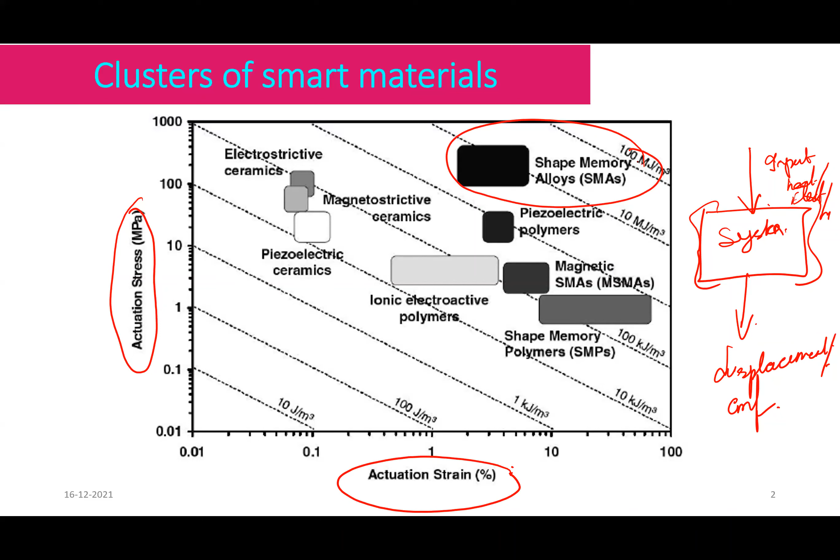That is where exactly shape memory alloys play a major role, because shape memory alloys have a good amount of actuation stress as well as a good amount of actuation strain.

Now, if I try to look into the fundamentals of shape memory alloy - like you have ice, when you heat the ice you get water, and further heating gives you steam. So basically there is some kind of phase transformation happening. The same phase transformation happens in shape memory alloy, which makes it respond to heat.

The austenite phase is a high temperature phase with a cubic crystal structure, while the martensite phase is a low temperature phase with a monoclinic structure. To give you clarity about this shape memory alloy, let us consider a wire.

This wire is initially in the martensite phase. Now I am deforming it, and it becomes a deformed martensite.

When I try to supply heat, it comes back to the austenite phase, and again it comes back to the martensite phase. So this is how the cycle basically evolves in the material.

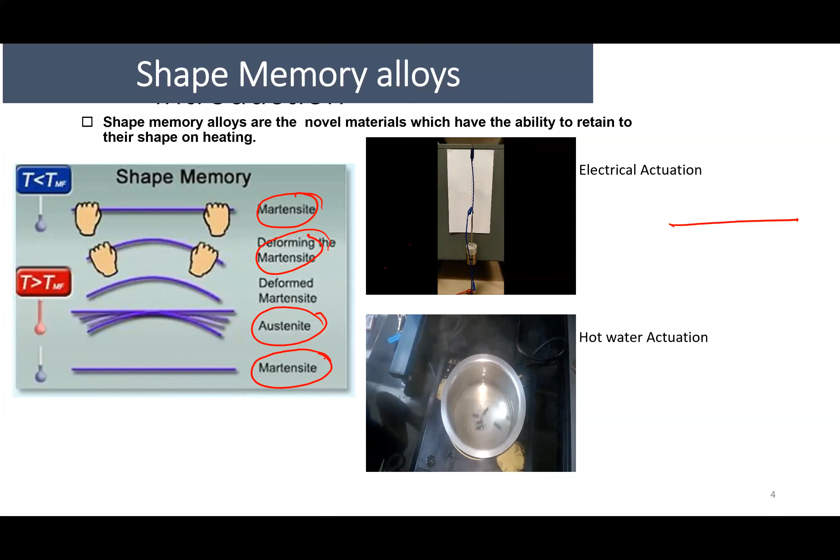This video was recorded in our laboratory, where you can see there is a spring which is tied to a weight. Now what I'm doing is supplying heat through electrical biasing. When the electrical biasing is not supplied, the material is in the deformed martensite state. When I apply heat through the electrical biasing, using H equals I squared RT, the material reaches the austenite state, and then it comes back to the martensite state. So we are trying to switch between the austenite phase and the martensite phase using electrical actuation.

This is a video where one of our PhD scholars deforms the spring and puts it inside hot water. When we put it inside the hot water, it tries to come back to its shape. You can have a closer view, where we see the response of this material is quite good, and it comes back to its original shape.

So this is basically the characteristic of the shape memory alloy, where with respect to heat, you are trying to manipulate your strain and your stress.

In addition to this, there is a behavior of these materials which we call superelasticity. This superelasticity gives the material a capability to store energy, so it can be used as a damper. These are the two peculiar capabilities of shape memory alloys.

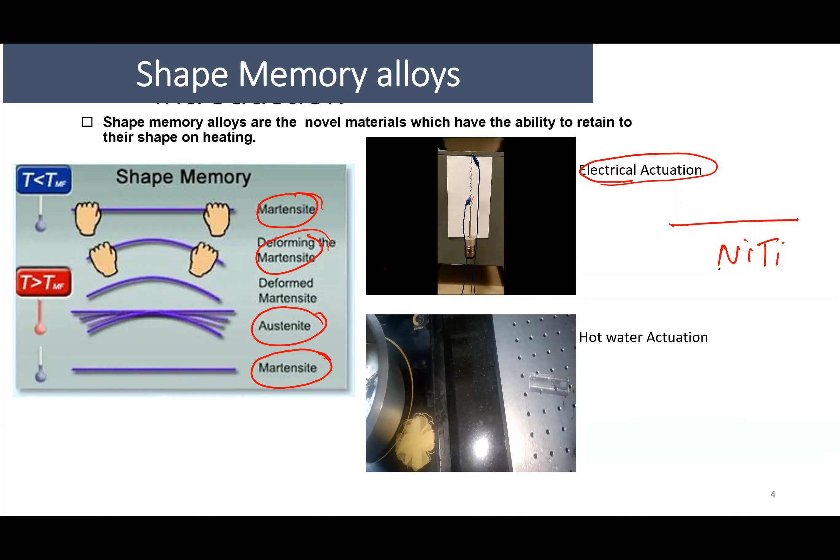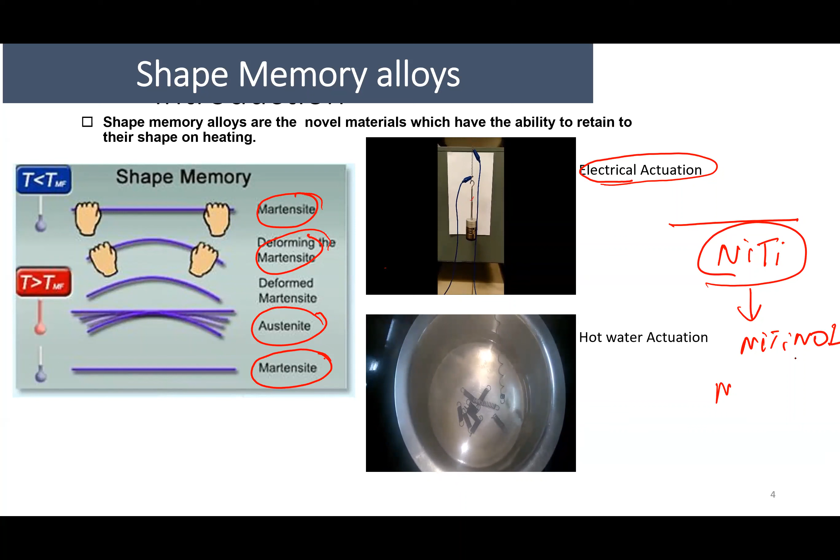As far as shape memory alloys are concerned, there are wide varieties of materials that exhibit this behavior. One major or standard material that comes to mind is NiTi, which we call Nitinol. The full form of Nitinol is Naval Ordnance Laboratory. This was developed in the US for ordnance purposes, which is why it carries that name.

So we have NiTi-based shape memory alloy structures. There are also some copper-based shape memory alloy structures available, like Cu-Al-Ni, Cu-Zn-Al, Cu-Al-Mn, etc. So these are the different types of copper-based shape memory alloys that are also available.

Now you may ask me: when should I go for NiTi structures, and when should I go for copper-based shape memory alloy structures? From an application perspective, wherever I have an actuation temperature in the range of 90 to 130 degrees Celsius, I can go for nickel titanium. Wherever I have an actuation temperature from 230 to 350 degrees Celsius, I go for copper-based shape memory alloy structures.

To give you a better picture, consider a vehicle: the heat generated from the bonnet will be sufficient to actuate a NiTi shape memory alloy structure, while the heat generated from the exhaust will be sufficient to actuate a copper-based shape memory alloy structure.

Now, as far as shape memory alloy structures are concerned, when we look at the overall structure based on literature or applications, NiTi structures are either in the form of bulk or in the form of a thin film. For bulk structures, we can fabricate thick bulk structures, actuate them, and arrest vibration. So this is one option.

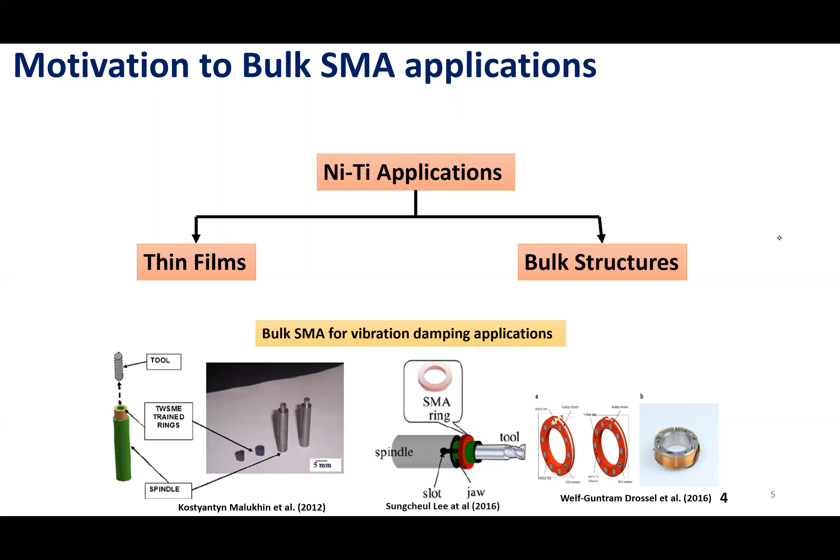Whereas in the case of bulk, it is quite limited because there are some issues with bulk structures. As far as NiTi bulk structures are concerned, people were more focused on developing powder metallurgical based systems - basically small cylinder kind of structures which they have developed, demonstrating the shape memory effect. In fact, most people have demonstrated the super elasticity behavior because of these bulk structures.

But as far as the major challenges are concerned, this was what we faced when we took shape memory alloy as our research interest. We found that there were some kind of issues in considering these shape memory alloys for different applications.

The one major concern is that when we started our research, shape memory alloy production was not available in India, so we needed to get it from abroad. Even a spring would cost us something around 3,500 rupees, so we needed to handle it carefully.

Another option is we get the shape memory alloy either in the form of a sheet, a wire, or a rod. That's it. So if I want to make a spherical or cylindrical structure, there were no vendors available to prepare those structures. It was not commercially viable for us to prepare those structures.

Third important aspect with respect to shape memory alloy is that to get such kind of displacement, we need tedious training. In order to reduce this tedious training, one option would be to integrate some kind of composite behavior in it. Otherwise, the training cycle itself will last near to around 50 to 60 times.

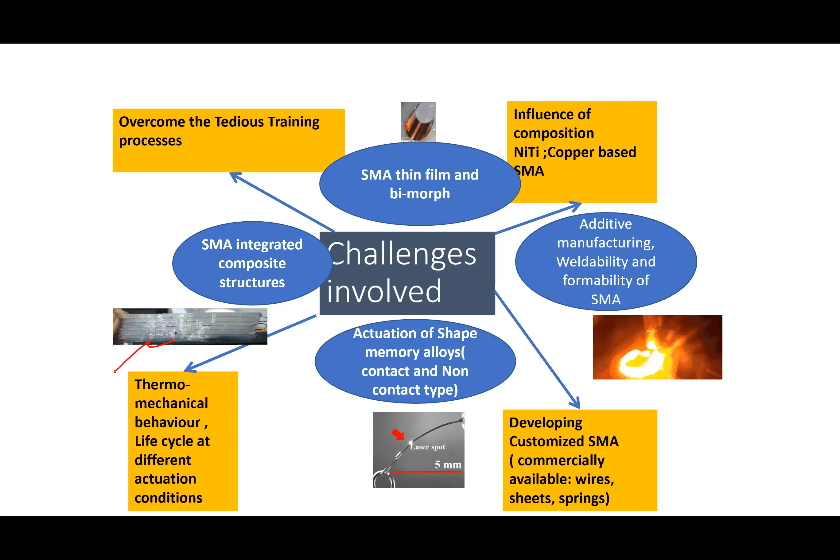As far as additive manufacturing is concerned, you might have gone through different lectures by different experts where people have attempted different types of additive manufacturing. We also thought, why can't we explore those options to develop such shape memory alloy structures using additive manufacturing? In this talk, we will discuss laser-based additive manufacturing of shape memory alloy structures.

Second, we have developed a wire arc-based additive manufacturing system - a low cost system which we developed in-house, basically to focus on shape memory alloy structures.

The third content which I would like to discuss is integrating a laser with wire arc to get thin structures, basically for some particular applications. We explored this possibility and could observe that there was potential focus in this particular region.

The fourth case study I would like to discuss is related to micro additive manufacturing, which is one of our prime current focuses. This system is completely developed at IIT Indore, where we have used a concept called laser induced forward transfer for fabricating microstructures. Any kind of microstructures or smart materials can be fabricated, which we will go into in detail.

So let us come to the first topic, laser-based additive manufacturing of shape memory alloy structures. As far as this is concerned, we had a motivation for starting this work - it was Industry 4.0. We all know about the different industry revolutions, and with respect to demand and availability of resources, different industry revolutions came into existence.

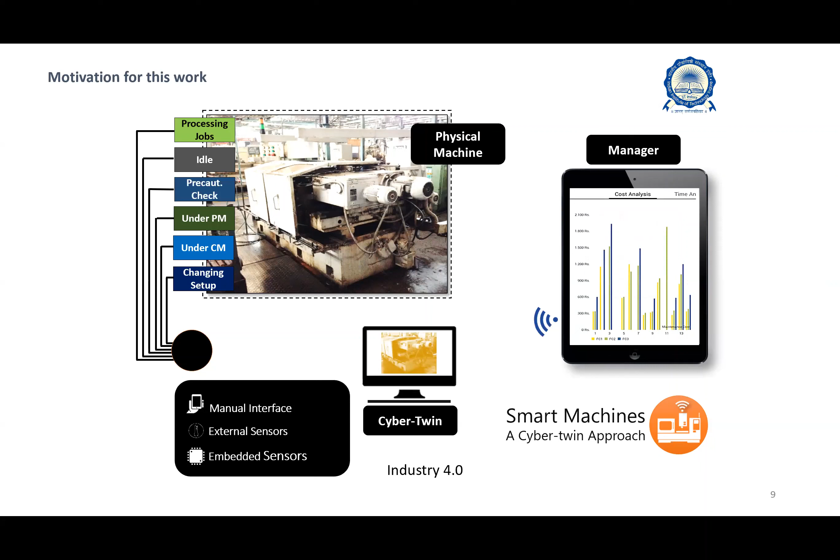He was trying to develop an intelligent system where there was an old machine, and he needed to make it intelligent. In order to do that, we need to incorporate a good amount of sensors and actuators into these systems, so they can pick up the signal and communicate it easily. Basically, your data sets will be quite heavy, and from the data sets you can take logical decisions. That is the idea behind this kind of system.

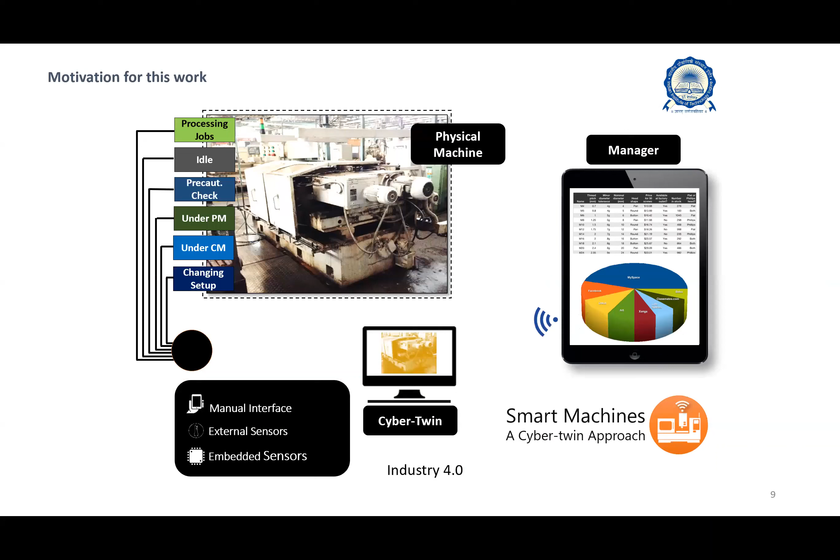The main core of this is to develop a cyber twin from this intelligent machine structure. As far as this machine is concerned, we need to develop customized sensors for it, and that is how this shape memory alloy came into the picture.

For any machine tool, take any system like a drilling machine or a milling machine - before it fails, two important things happen. One is a high amount of heat, and another is vibration.

Since our material is more sensitive to heat, we thought we would fabricate a structure over the quill. Over the quill, we try to deposit our shape memory alloy along the tool holders. When heat is generated, this shape memory alloy holder gets heated up, and we have trained the system so that it will arrest the vibration. When it arrests the vibration, you are prolonging the failure for a long time.

In the meantime, there is an infrared camera available. Through this infrared camera, we can pick up the signal, and the signal will be efficiently transferred to the concerned shop floor manager, so he can get involved in maintenance of the equipment or make the necessary decision in changing the process flow.

The major challenge involved is that I need to deposit an SMA spring on such structures, or fabricate it and fit it based on the requirement. The second important aspect is it should have the capability to arrest vibration, and since it's a metallic layer, it should also have the capability to actuate because of the heat. These are some of the major concerns we had in mind.

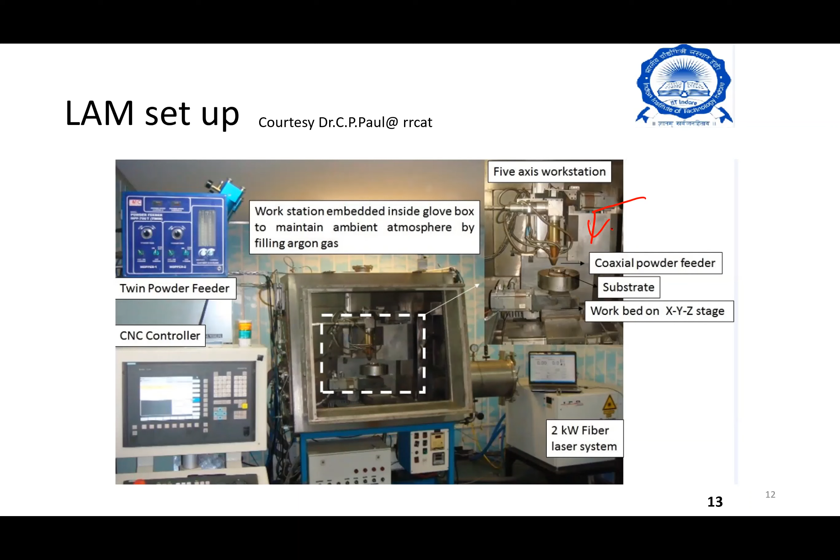The titanium substrate chosen for our experiment is expected to allow for easy debonding, as well as take care of the thermal expansion because of the difference in Ni and Ti.

Prior to the experiment, we cleaned and sandblasted our system to roughen the machined surface so as to increase the laser absorption. An argon gas was used as a shielding and carrier gas, and it prevented oxidation.

Basically we took a 1:1 ratio of nickel titanium. There are 3 different combinations with 3 different powders we use. One combination's main focus is to check its composition capability - with respect to variation in composition, how does it behave? So there are 3 different NiTi compositions with powders at 3 different weight percentages: one is NiTi 45-55, another is NiTi 50-50, and another is NiTi 55-45.

In addition to this, since our main motto is to have an actuation, we should have some kind of ductility. So we went for a kind of ternary composition. In this ternary composition, we mixed NiTi with Cu, etc.

In order to optimize the process, a number of tracks were deposited at different process parameters. After deposition, the process tracks were examined and the uniform track was analyzed.

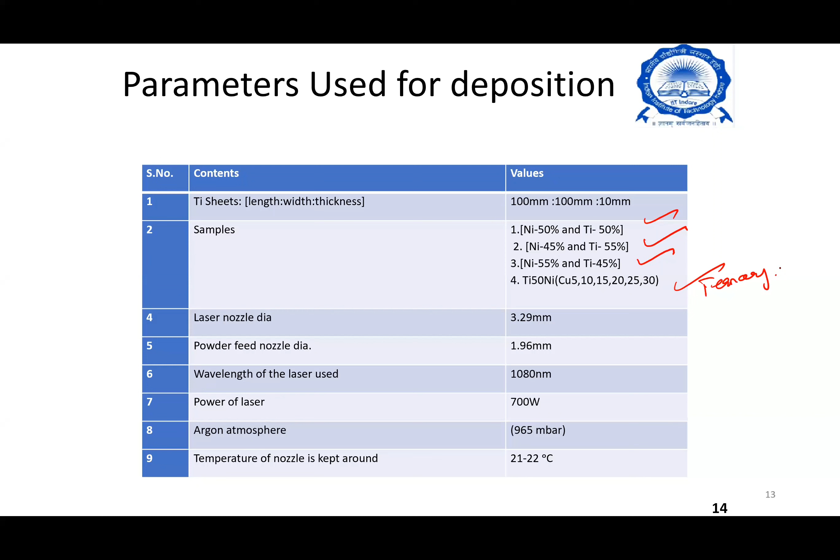Since we are using a powder, our main motto would be to investigate the influence of process parameters. One key parameter is the particle size chosen. The powder particle for Ni and Cu powders had a size within the range of 45 to 106 micrometers, whereas it also has a range of 75 to 150 micrometers for titanium.

These ranges of powder particles were selected for the experiments. Powder particles with a bigger size and range result in a semi-fused particle due to smaller absorbed laser energy per unit.

When we talk about the effect of these process parameters, as far as the laser additive manufacturing process is concerned, this process is basically governed by the laser power, then the beam diameter, then the material feed flow rate, and then we can also talk about the scan speed.

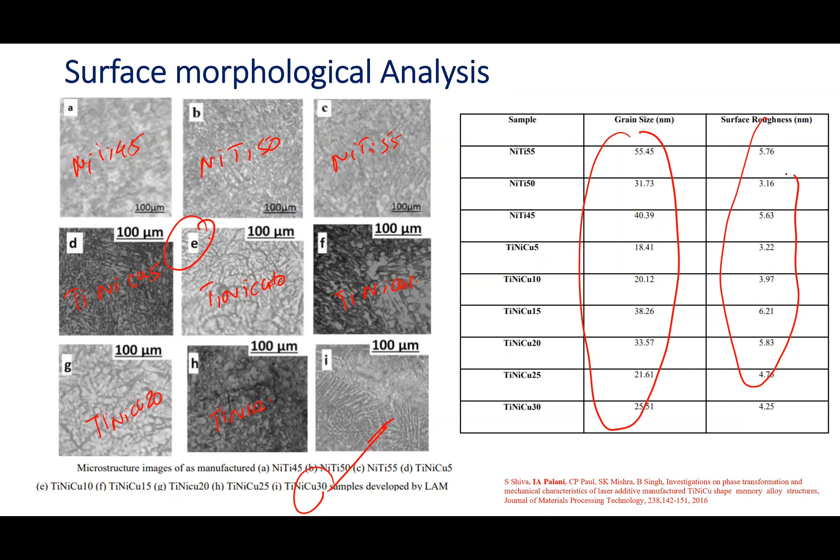When we closely observe the AFM analysis, we could map our grain size with respect to the surface roughness. As far as our case is concerned, the surface roughness is of least concern, so we don't need to worry about it.

As far as this material characterization is concerned, the samples of these laser additive manufactured structures were cut transverse to the direction of laying and prepared using a standard metallographic technique, and a microhardness measurement was carried out at an incremental distance of 25 micrometers at a load of 500 grams.

As far as this case, the average microhardness in the case of NiTi structures is in the range of 380, 440, and 525 VHN. The value of this microhardness is more for a titanium-rich sample, and this might be due to the formation of a hard phase caused by the increase in titanium content.

Now, when we talk about the microhardness of the ternary alloy, the NiTiCu samples fabricated by this technique showed a microhardness in the range of 237 to 297 VHN. The microhardness in these samples increases with increase of copper concentration, and higher concentration of copper causes the formation of precipitates like TiNiCu2 and Ni2, which attribute to the increase of microhardness due to internal stress. But in the ternary alloy with the inclusion of copper, this problem could be overcome, as the variation in hardness is uniform across the sample. This is almost a clear indication that a good alloy formation has been formed.

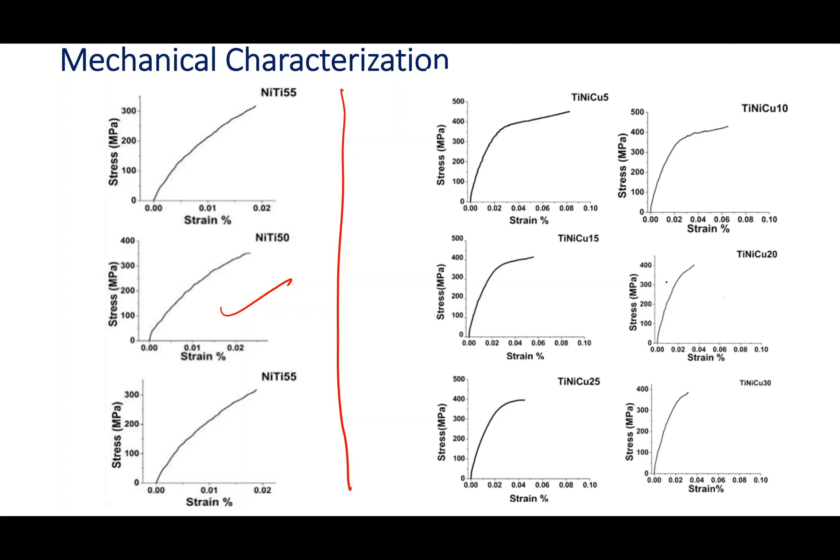Now when we talk about structural analysis, one of the key parameters with respect to shape memory alloy is the formation of the B2 phase. This B2 phase plays a major role, which basically confirms that there is a kind of shape memory effect exhibited on the surface. This was evident with respect to NiTi structures as well as TiNiCu structures, confirming that we have a shape memory alloy effect being formed.

But when we tried to fabricate the structures and put them in the field, within no time breakage was observed, because the results show there is quite a good amount of brittleness present. In order to avoid that, when we investigated, we found there was some non-uniformity in the structure. This non-uniformity happens because of the exothermic reaction generated between the NiTi and Cu structures, causing some amorphization here and there, along with residual stress generated in that region.

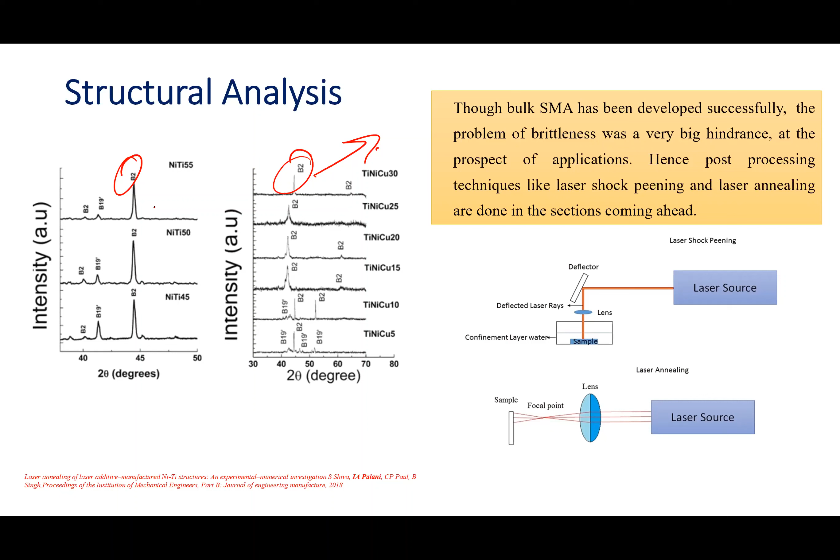So what we thought is we will go for some kind of post-processing. Since we have a laser in mind, we thought we would go for laser-based post-processing. One technique we employed is laser-based peening, and the other is laser-based annealing. With laser-based annealing, we thought we could somehow eradicate the amorphization and relieve the stresses. In the case of laser peening, we try to induce uniform stresses along the surface to get a proper structure. This comparison gives us clarity.

As far as functional characteristics are concerned for shape memory alloys, the major one is DSC, which is differential scanning calorimetric analysis. This scanning calorimetry analysis basically gives us the exact austenite start, austenite finish, and martensite start, martensite finish temperatures. From an application perspective, this gives me a window of when my sample will get actuated, and what temperature range it exactly gets actuated in.

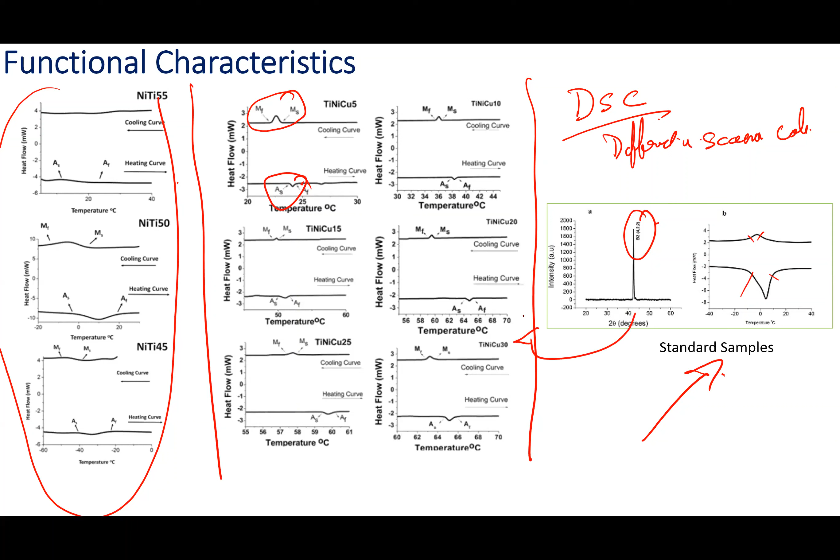One of the key applications, coming back to our motivation, is that our shape memory effect is confirmed, whereas we need to study how the storage modulus plays a major role. For that, we did an analysis called dynamic mechanical analysis.

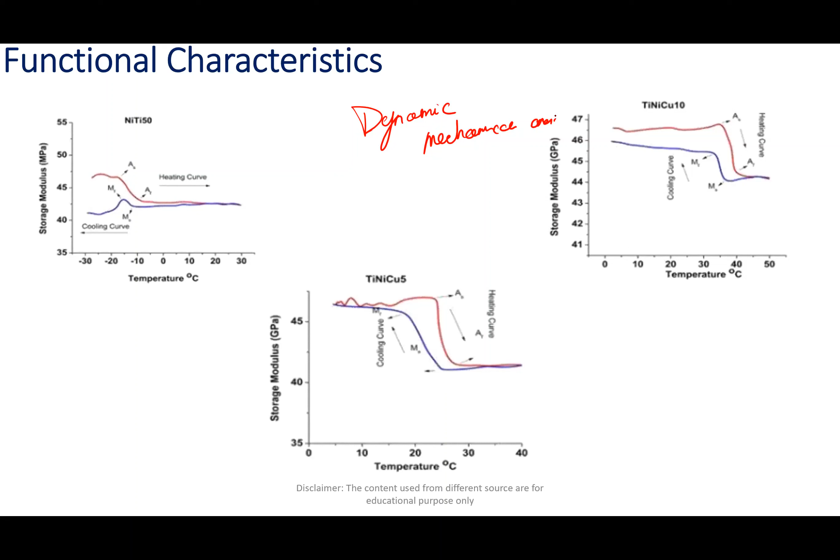This dynamic mechanical analysis gives us clarity about the storage modulus. Considering the elastic energy and storing properties of the material, the properties are analyzed on cooling and heating measurement by using several frequencies of applied dynamic force. Basically the structure will look something like this. If this is our sample, we mount it and apply a dynamic loading in this structure, and we also study the austenite.

From this we can estimate the austenite phase, the austenite start and finish, as well as the martensite start and finish of the structure. This is similar to what we call Young's modulus. This is almost away from the DSC.

So with this we are closing the first module. Any questions or doubts in this? Participants, please write your question in the chat box, or otherwise unmute yourself and ask the question. Okay, since there are no questions, no questions, Dr. Palani? Okay, please, we will continue. Yes, please.

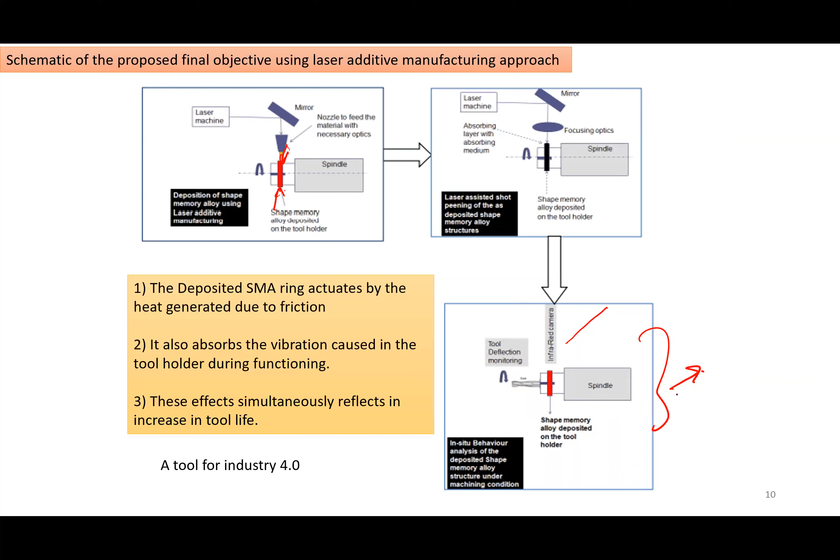Okay, shall we go to the next case study? The next case study is something related to wire arc based additive manufacturing. As far as this is concerned, we were more concerned about developing a device called a small micro gripper. For this micro gripper, let us consider I have a shape memory alloy which I have fabricated in the form of a circular ring.

I'm just dicing it into two. So both these splines, I'm just putting it over here, and then there is a gripper which is available. So what I'm doing is I'm just actuating it. When I try to actuate, it becomes straight and it will hold the object. When it tries to hold the object, and when you cut off the heat, it comes back to its state. That is how we can initiate a two-way actuation in this.

Now, the interesting part of this particular system is, suppose I need to use it in some kind of reserved environment where I cannot use a power supply. There, I can use hot water - I can just push hot water inside for actuation. Another aspect is I can use a laser so that at a distance, in that environment, I can just actuate my system.

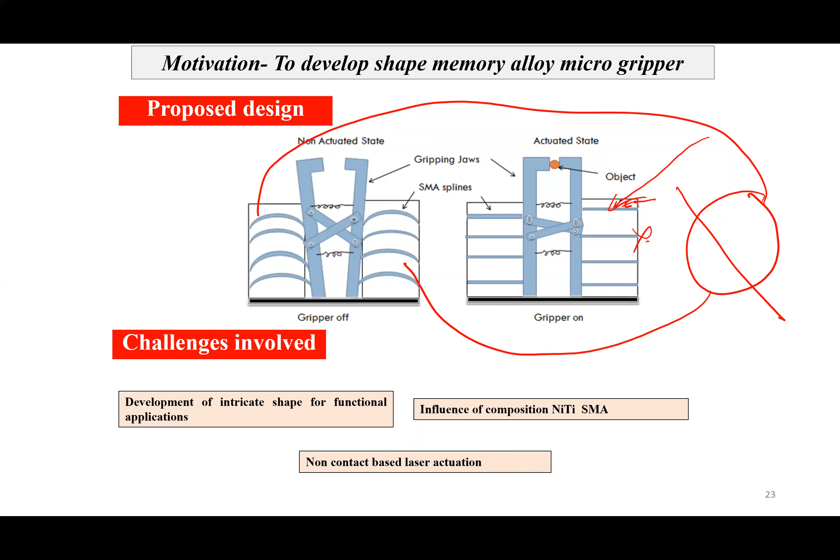You might ask why we didn't use the earlier system. What we could observe is, in the earlier system, we could get the property, but when we try to look into the reliability and life cycle of the shape memory alloy we fabricated, it was very difficult for us to use it for a longer life. That is because we are having two powders, and we are trying to fuse these powders to make it in the form of a shape memory alloy. So internally there were some kind of exothermic reactions coming up, and during the heating cycle we could observe it was initiating some kind of failure on the surface.

So in order to avoid that, we thought of developing our own additive manufacturing system. This is a simple MIG based additive manufacturing. We call it wire arc based additive because we use an NiTi wire which is commercially available, and we feed the wire through a MIG gun. We manipulated the structure - we developed our own XYZ stage, and this XYZ stage is fed to a controller where, using a CAD model, we can convert into a CNC code, and that CNC code is fed into the XYZ stage to create the structure.

So the flexibility of this system is we don't need to worry about maintaining the powder composition, etc. We just get the wire - this machine has a capability to use wire in the range of 0.8 to 1.2 mm. We can select that wire diameter, feed it, and fabricate the structure. This is a small video which shows how it tries to build the structure. We dedicated this machine basically for shape memory alloy so that we can build customized shape memory alloy structures - that was the idea in mind when we developed it.

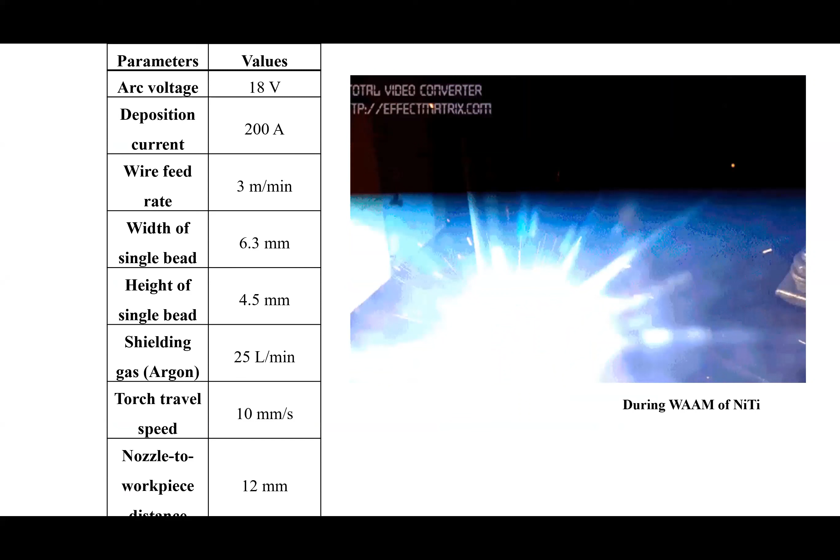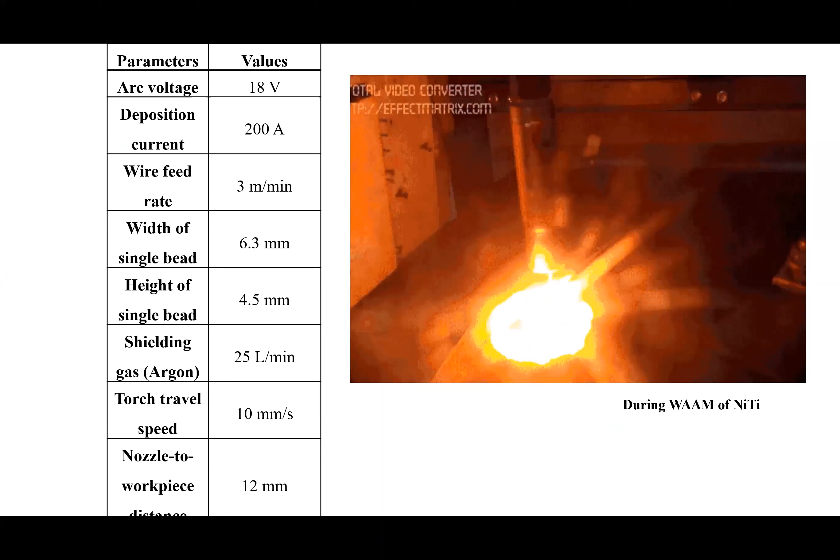And the interesting part in this is, as we all know, the crystallization or structural aspect of it basically depends upon the substrate heating. So we employ two different substrate heating methods. One has a capability to heat from room temperature to 600 degrees Celsius, so that we can take care of the crystal structure which is being generated.

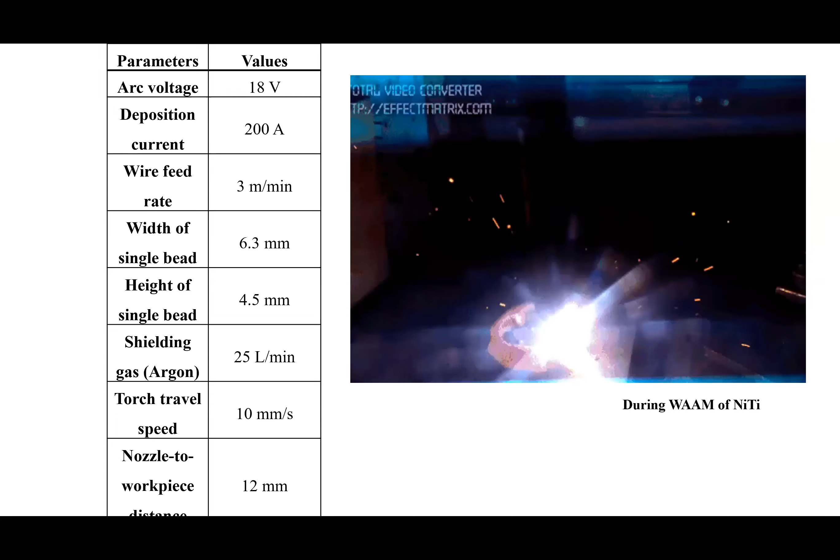Another aspect is, since we had a cooling bed, we pumped liquid nitrogen inside it. This also helps take care of the crystallization. It has a turret-based rotary system, and in this system we kept two substrate heating systems.

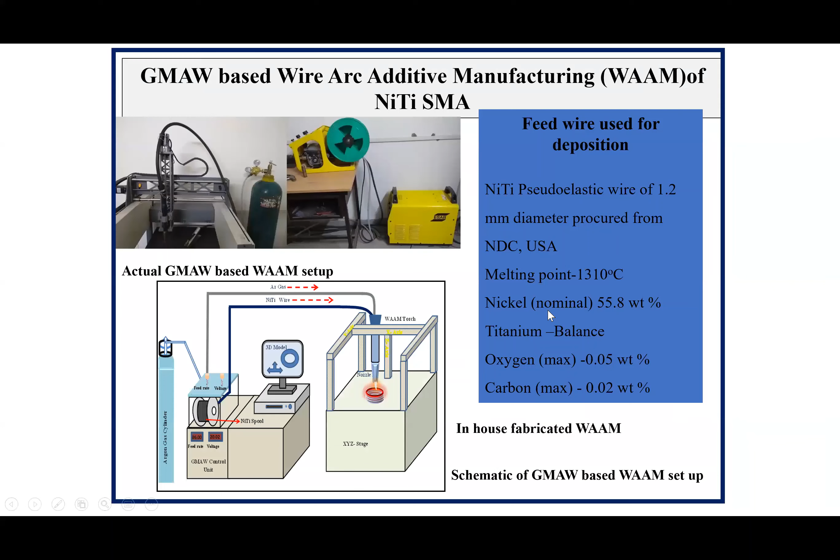So we just make it in the form of a thin... Section, Palani, we lost you, can you maybe explain from the last slide? From this? No, not like that. Can you go further? From here. This one? Okay, is it okay now? It is okay, the second time it's happening actually. It's okay, no problem, please carry on.

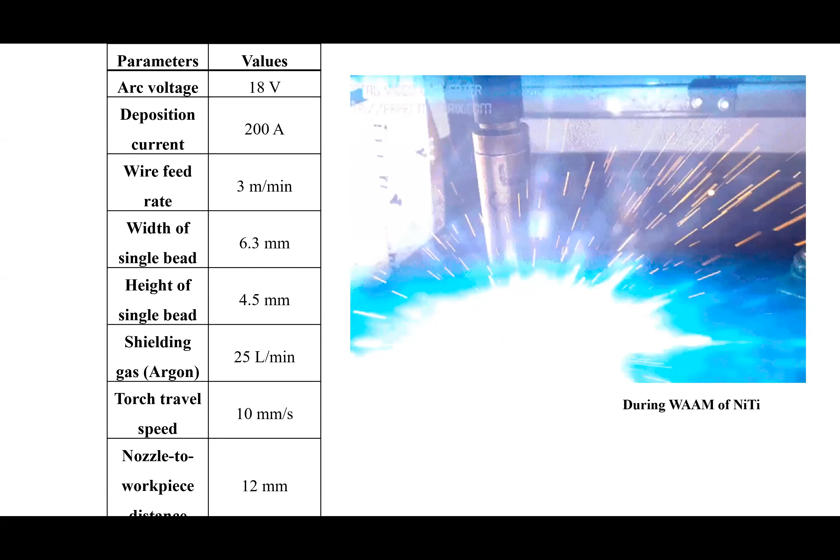As far as this wire arc based system is concerned, we could manipulate two different heating bed systems. One heating bed system has the capability to vary temperature from room temperature to 650 degrees Celsius, so that we can take care of crystallization during the building of the structures.

The other bed had a cooling arrangement where we could feed or pump liquid nitrogen inside it, so that we can take care of the crystallization behavior in that structure. We also had a turret mechanism so that we can fix these structures into place.

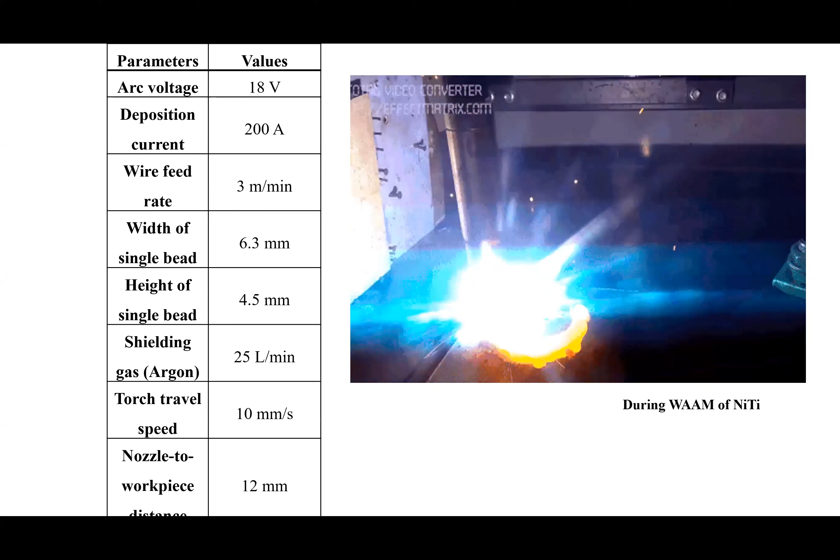Now, as far as sample preparation or methodology is concerned, we built NiTi structures. Using wire EDM, we made small pseudo-elastic NiTi structures, and then annealed them to activate the SMA-based behavior. By applying stress, we can get detwinned martensite as well as austenite phase, and by comparing these two we can achieve actuation. That was the idea we had in mind.

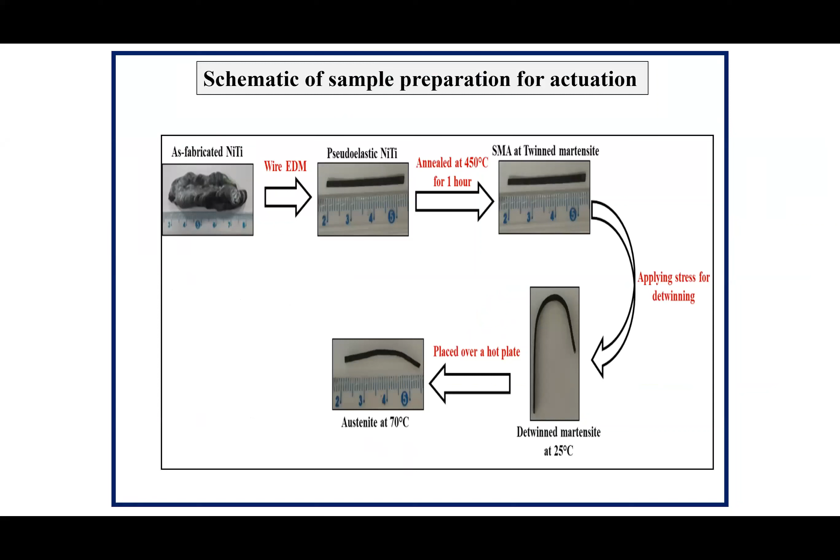In fact, it was quite flexible for us, because whichever sample we fabricated, we could evidently see the actuation coming out of it. I'll go into detail on how we predicted and analyzed our actuation.

Before going into this, let's look at it from the additive manufacturing perspective—this is kind of a crude method. In fact, from our group, it was the first of its kind, coming up with this technology of fabricating NiTi structures using wire arc.

In order to get metallurgical grounding, we collaborated with a Russian university, from St. Petersburg University. They have been working on powder metallurgical based NiTi structures and have a strong background in the metallurgical aspect of shape memory structures. We collaborated with them to understand the mechanism happening in it.

We could easily fabricate the structures, and when we analyzed them, no cracks were observed, because in most cases we used substrate heating of around 250 degrees Celsius in order to maintain homogeneity.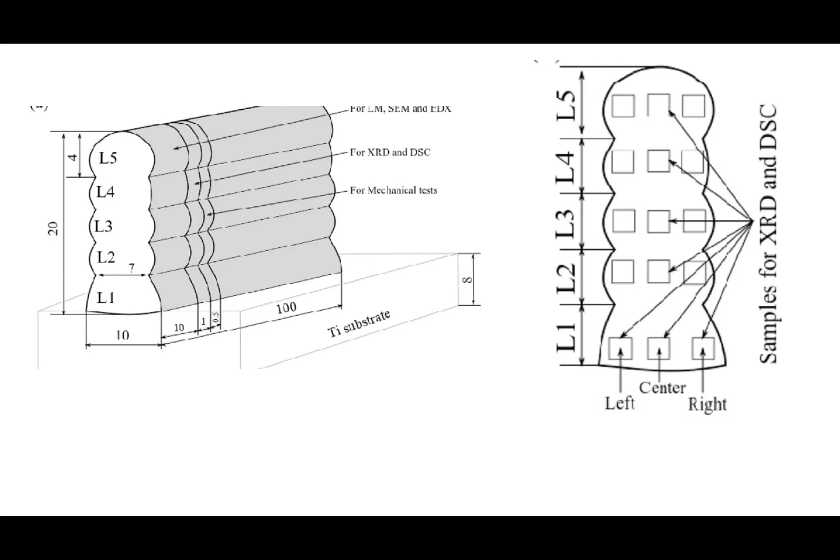To understand the behavior, for the first layer we took samples at different points—at the left, at the center, and at the right—and analyzed the microstructure behavior. This is a closer view of the microstructure. In the first layer, there was a mixture of two phases, basically a dendrite matrix and an interdendrite space.

Long columnar grains with a length of a few millimeters have been formed at the intermediate layer. Usually this intermediate area of the WAAM contains columnar grains that grow throughout the layer.

At the same time, in the present sample, the columnar grains grew within one layer, and a precise interface between the layers was formed. So during deposition of the consequent layer, some part of the previous layer was remelted and recrystallized together with the new layer, leading to formation of a clearly visible remelted zone.

Between the layers, on top of the 5th layer, equiaxed zones were observed. The same zones were found on top of the 3rd and 4th layers, near the surface side, which were not subjected to remelting during deposition of the consequent layer.

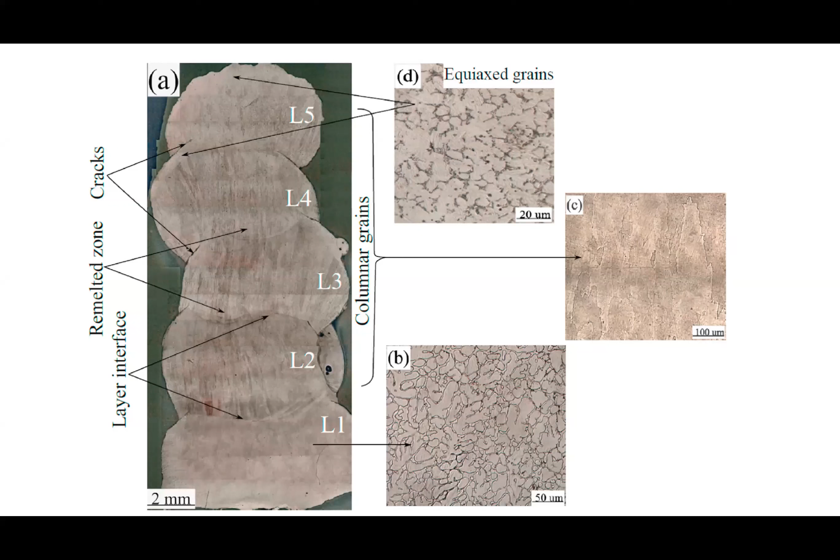From this, we can say that the structure of the NiTi along the cross section is typical to alloys produced by WAAM, and the mechanisms of grain formation are almost uniform throughout. Now, when we talk about the chemical phase composition of these NiTi structures, we used SEM and EDAX analysis, and also some mechanical analysis.

The microstructure and chemical composition in the different layers of the samples were studied with SEM, EDAX, and XRD. In the SEM image of the first layer structure, two phases are observed.

One is a light gray phase marked A that looks like a dendrite matrix, and a dark gray phase marked B that occupies the interdendritic space. The EDAX analysis shows the chemical composition of this light gray phase.

It is almost 52% titanium and 48% nickel, which corresponds to a titanium-rich NiTi phase, since we have a titanium substrate. However, the dark gray phase consists of 67 at% titanium and 33% nickel, corresponding to the Ti2Ni phase. This is confirmed by X-ray diffraction analysis, showing the reflex of the B19 phase.

Quantitative analysis of the SEM image of the first layer was performed by the system. We could see the fraction of NiTi phase was about 75% on average. A large amount of Ti2Ni phase was observed in the first layer, and a precise interface was visible between the first and second layer.

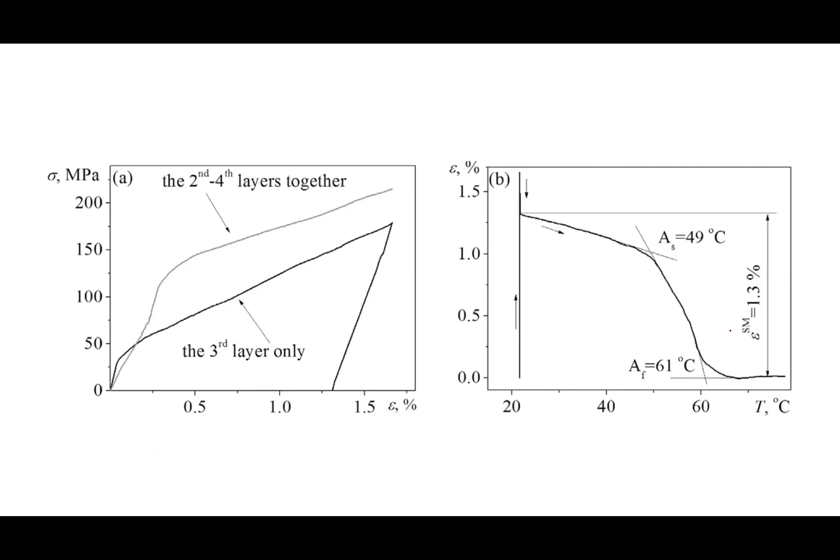With this idea, we did a kind of stress strain analysis to study the pseudoelastic behavior as well as to study the austenite start and austenite finish of the surface, where we could observe that with respect to pseudoelasticity property, it was behaving in a very good way. Whereas with respect to shape memory alloy property, we could have better actuation characteristics coming out of it. This is a video where we were fabricating a kind of spring structure, using a wire arc based additive manufacturing head.

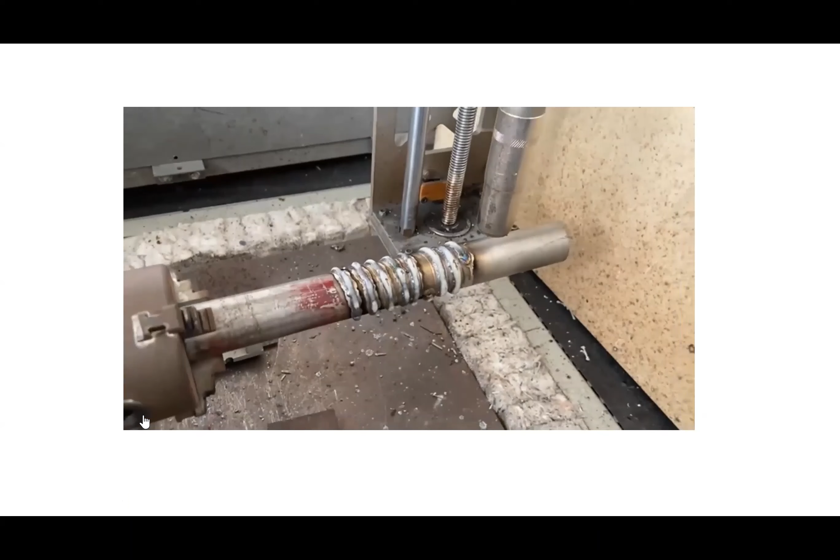So in this wire arc based additive manufacturing, there is a kind of deposition which is happening, and this rod currently is not heated up. However, it has a capability to get heated up with respect to an electrical biasing, so that you can heat it and then go for a deposition.

One of the key aspects of this, or I would say the outcome of this work, is basically we could understand - in fact more investigations are currently going on in this direction - with respect to influence of temperature, influence of substrate temperature, and influence of different substrates.

Currently we are using a titanium plate, so we need to go for a Ni rich system. We are also looking for a Ni based plate to see how the Ni rich system works, because for most biomedical applications, Ni plays a major role. We are also looking into some kind of stresses which are being involved in it. So currently we are focusing on this type.

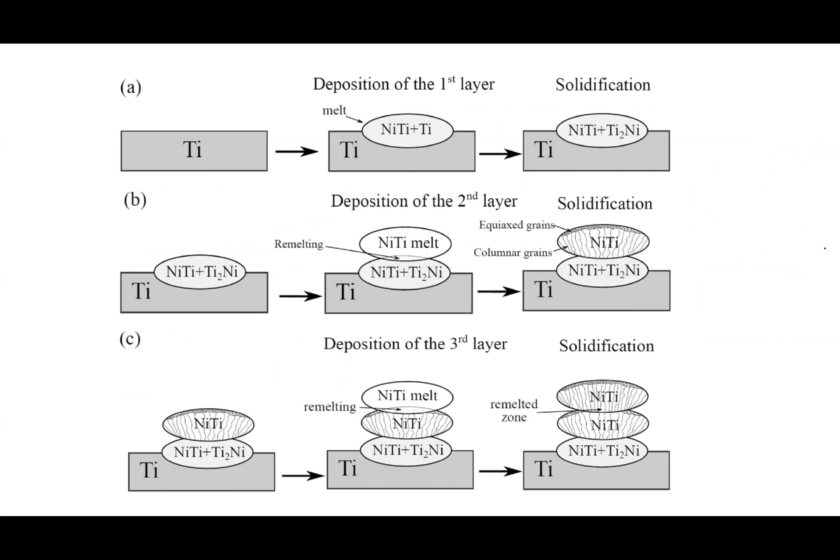But as far as the actuation perspective is concerned, coming back to my earlier motivation, in this case I require thin sections. In most of these cases, my minimum feature size is something around 1 centimeter, or close to it. And I need to go for an EDM cut to make the structures, and then actuate it.

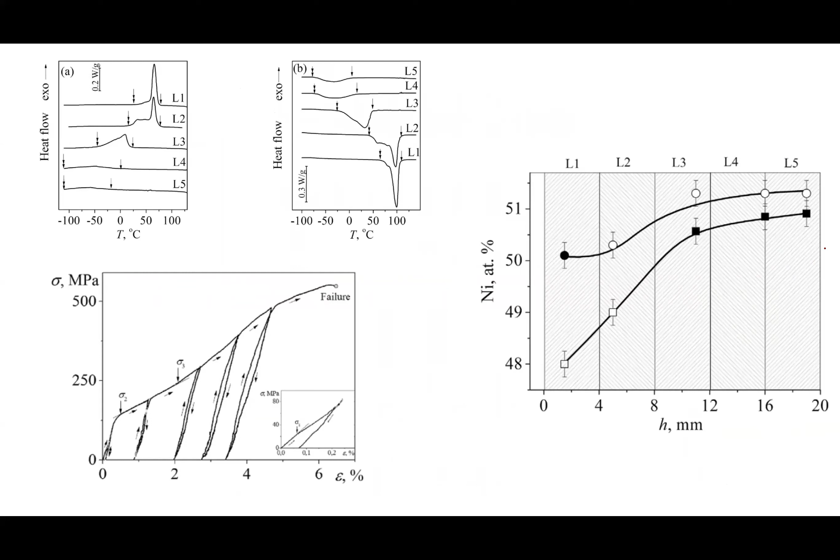In order to avoid this, we thought of using a technique called laser assisted hybrid wire arc based additive manufacturing system. As far as this laser assisted system is concerned, like in our MIG based welding system - if this is my sample - there is an arc which jumps and tries to deposit.

Now, when an arc jumps on the surface, the surface also plays a major role in manipulating my arc. So what I can do is, if I have a sample and try to make a small laser marking on this region, then I can somehow concentrate my arc in this region so that I can make thin sections. With this as an idea, we thought of developing this system.

In this system, we had a small 50-watt fiber laser, which is basically a kind of marking laser that we used. This 50-watt fiber laser was used for marking. So what we did is we used different parameters, and these parameters were used for creating such kind of lines.

The laser we used had a galvano scanner in it. Using a galvano scanner, we can manipulate our system so that we can take care of the track. With respect to the track, the major key parameters involved are the track width, the number of passes, and basically the trench.

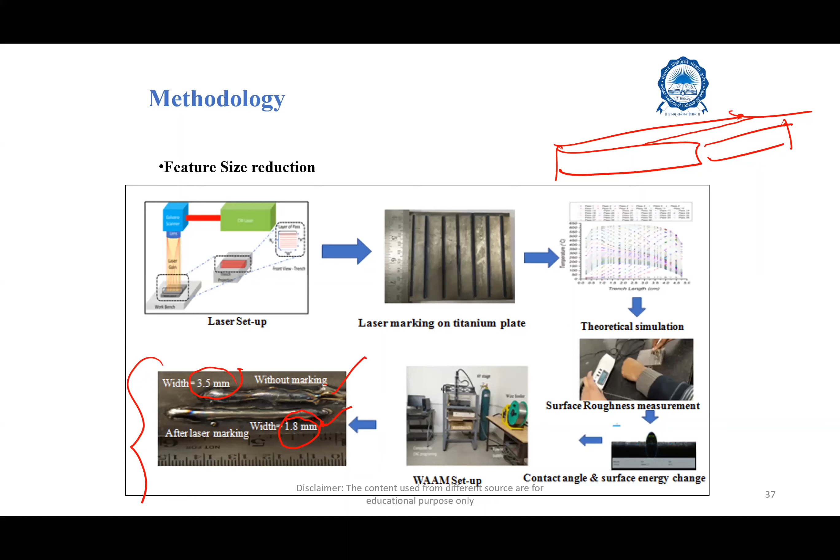So for inducing the surface roughness, what we are trying to do is use a laser as a key player for creating the mark. For that, we have a 50-watt laser fitted with a galvano scanner, and basically it has a TEM mode of beam, which creates a shallower groove at the center. So the TEM mode would be something like this.

So if this is my surface, I get a Gaussian beam profile in the form of a shallow groove at the center of the bottom with more depth at the sides. These TEM modes allow the concentration of lower energy at the center of the beam and more energy at the edges.

So the roughness profile increased with an increase in the number of laser passes due to the consistent impact of the laser beam irradiation and the rapid vaporization of the material.

In fact, the roughness of the substrate strongly modifies the wettability of the surface, and the wettability is analyzed in terms of the surface free energy, which we call SFE. Basically, it is taken care of by the contact angle with respect to the interfacial tension and the solid vapor phase. With respect to this, we are trying to initiate an interfacial tension along the surface.

When we try to initiate an interfacial tension, we can focus our arc in that particular region to create the structure out of it.

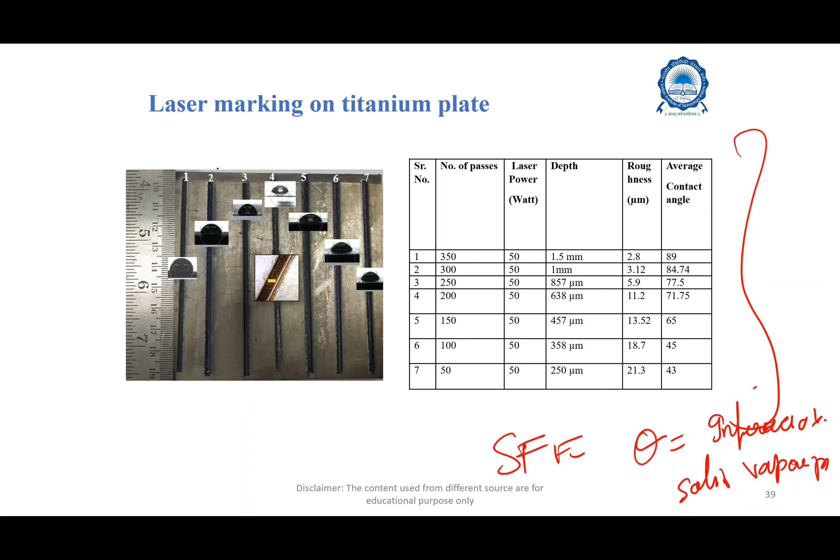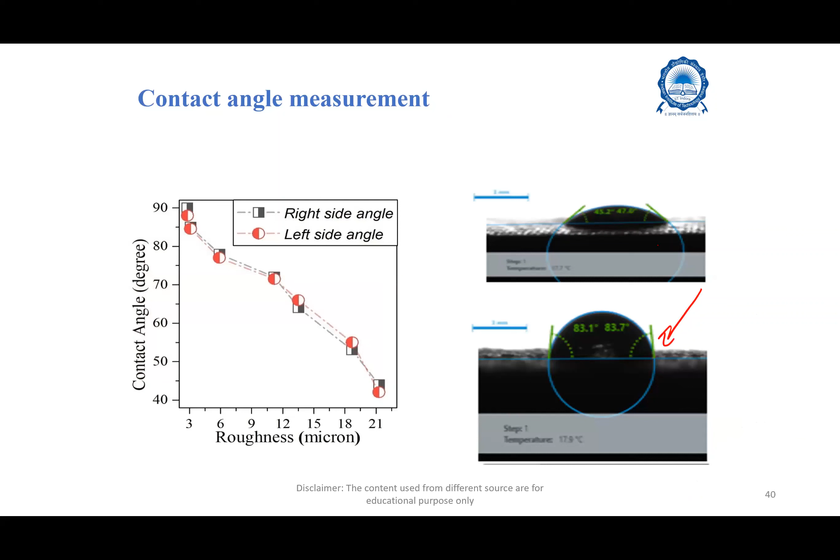So our first study was to do a set of experiments. We did marking with respect to the number of passes, and then we studied the contact angle behavior of the system. This is the closer view of the contact angle measurement, where we could see how the contact angle behaves, how the wettability of the structure is taken care of, and how the interfacial tension is also taken care of.

Now let us discuss the microstructure characteristics of these systems. So what we did is go for laser marking and study the microstructure behavior. This marking was done on a titanium plate, and the microstructure after laser treatment had a kind of alpha-Ti with the presence of beta-Ti lamellae in the intergranular region before marking.

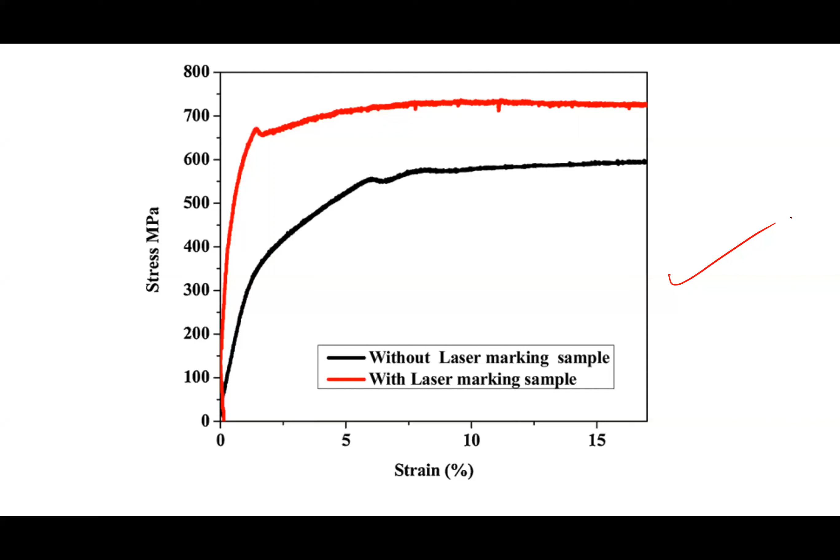In order to study the electrical actuation, we had a small system developed in-house. The main idea of this system is to study the electrical characteristics behavior. We incorporated the structure in it, kept some load on it, and tried to study the actuation characteristics as well as the life cycle behavior. I have a video which shows how the actuation happens, and this is the overall life cycle behavior we could achieve.

With respect to marked and unmarked samples, we observed that the marked sample showed better displacement compared to the samples without marking. The interesting part is that you don't need to go for post-processing.

Like in the earlier case, when we went for direct wire arc based additive manufacturing, we needed some kind of post-processing. We may need to dice the sample before doing the actuation. Whereas in this case, after the laser marking, we could directly take the sample and do the actuation. Let me show you a small video of how the actuation was performed.

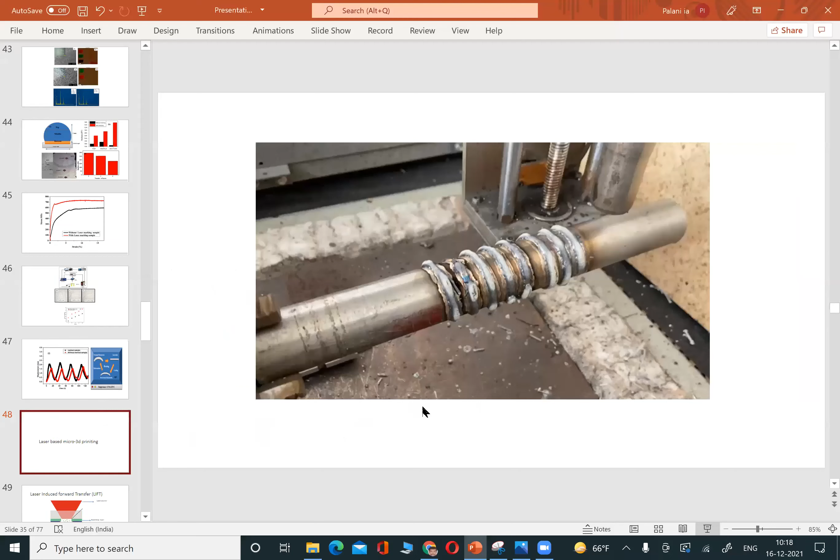So this is an actuation where we can see a plate. Over the plate, we have kept a thin section of the NiTi structure, and we are trying to actuate it. This is a thin sheet which we have fabricated.

When we come back to our earlier motivation, one important aspect we need to look into is how it gets actuated with a laser.

Hope you could see the video. This is the as-manufactured sample. What we have done is the actuation using a laser, so that for our gripper application, we can go for a non-contact based actuation.

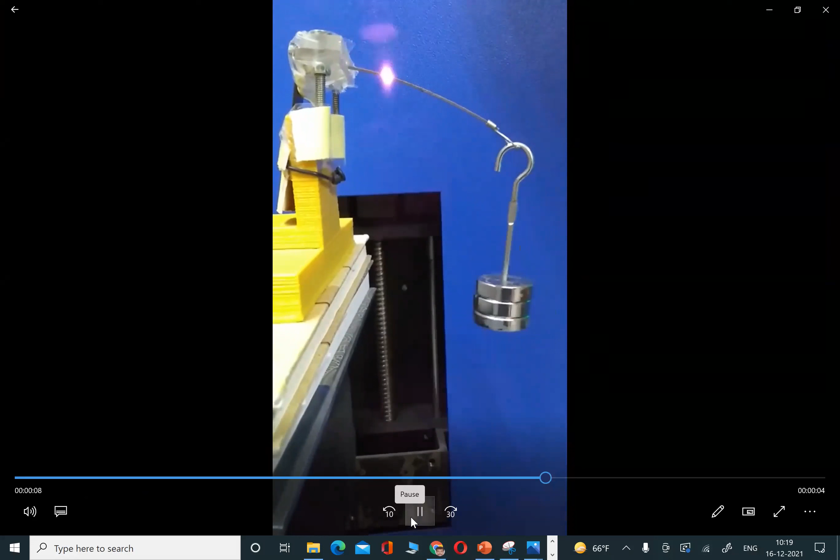There is a laser displacement sensor incorporated in the system. This laser displacement sensor will study the displacement variation, so that we can see how the life cycle behaves. So any questions or doubts in this?

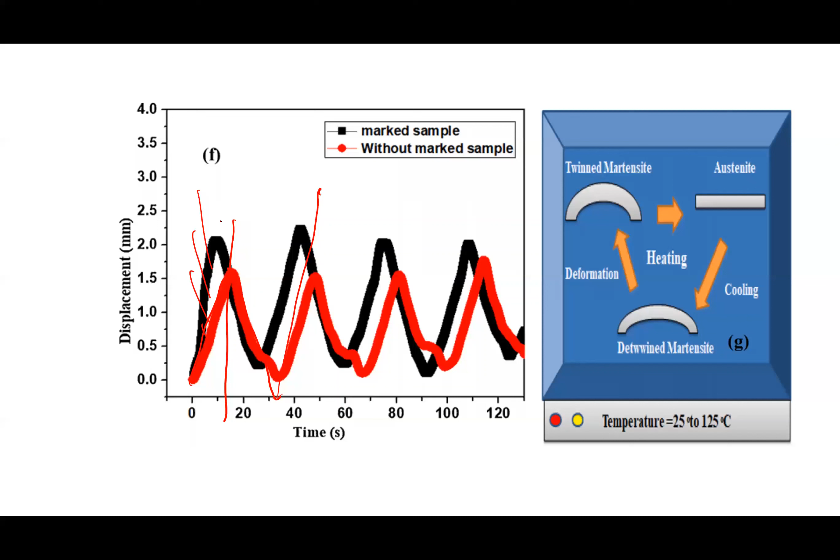Even as my wall thickness increases, even in a single layer, do I have to scan multiple times? No, actually your substrate is sufficient enough. When you try to mark it in your substrate, it takes care of your wall thickness towards the entire region.

I will just show you this one. This is an observation with track width and track height, with marking and without marking. With marking, you can see your track height is increasing and your track width is well within the limit. So you don't need to do it each and every time. Once you are done, it is sufficient enough, you can build your track structure.

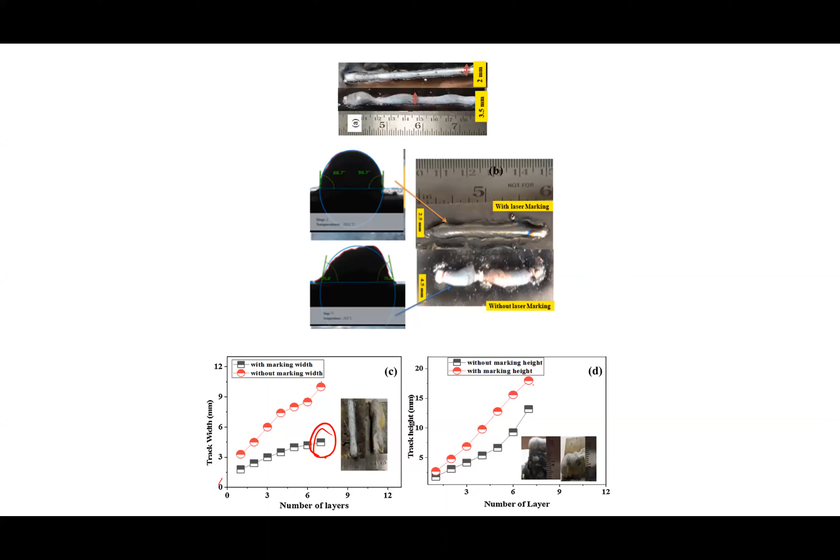What is the effect of heating multiple times on the life of SMA throughout the application? As I understand, there are two types of heating - during fabrication or during actuation. During actuation, sir.

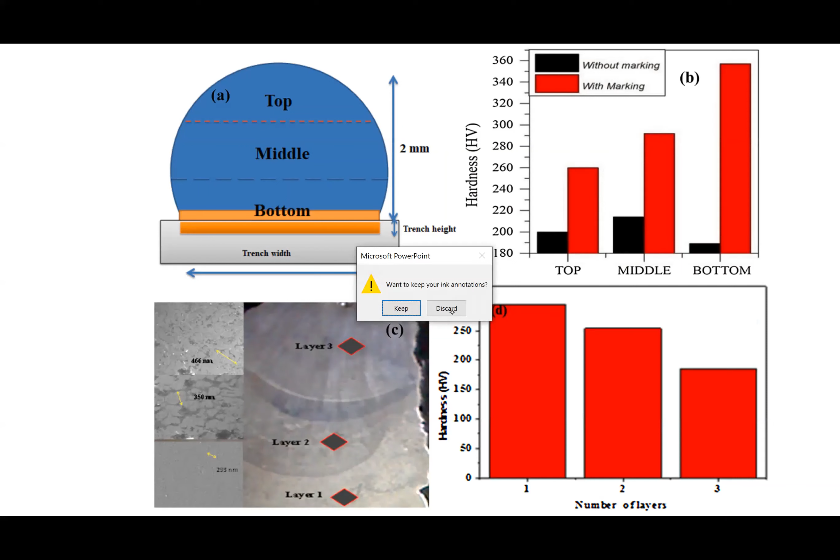I would like to explain this question with respect to this particular video. So in the video I showed you, we used a laser, and in this case I applied a load to it. So with respect to lifting your load, you are trying to supply heat to your surface.

Suppose based on my application there is going to be a minimal load, then appropriately the amount of heat I supply will be less. The amount of heat supplied depends upon the thickness of the material, the displacement, and the response time. So the more heat we apply, in due course of time we will lose our recovery ratio. With respect to this, the heating here is on a completely different plane.

Here a huge, high amount of energy is bombarded on the surface because we are using a laser. So even with a laser, when we try continuous actuation up to 2 lakh cycles, we didn't have any issue with respect to recovery behavior. That is an interesting aspect of shape memory alloy. In a nutshell, your shape memory alloy is quite reliable with respect to heating characteristics.

Sir, I have a question. The blocks that you've deposited, for sectioning, would you have gone for wire EDM, sir?

So whatever you mentioned, Midhani sells both wire form and powder form, right? Yeah, but not on a small scale, because they request us to send orders of something near to around 15 kgs. So if we need to buy, we need to buy it in 15 kg wire. Whereas Veera's Traders, who is in connection with some of the local suppliers, sells at a lower volume. He's from Hyderabad, so he sells smaller quantities.

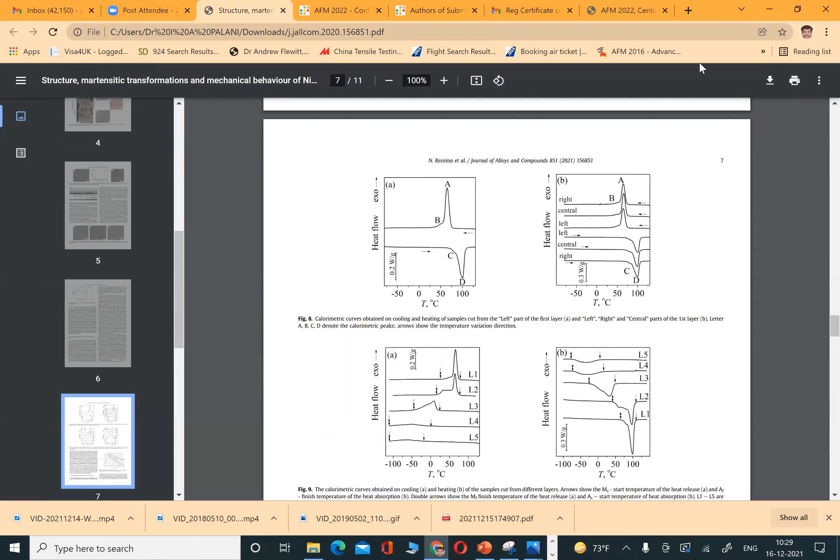Thank you. Shall we continue? Yes, please. Okay, so now the next level. Till now we were looking into this at a macro level. Now we will slightly move to the micro level, where this is a completely peculiar technology which I would like to discuss in this forum.

This technology is used for printing. Normally in your printers, there is some kind of inkjet printing. These inkjet printers are capable of printing some kind of circuits, etc. Similar to this, we are using a laser, manipulating these laser systems. In fact, we have developed our own unit to print microstructures. The mechanism behind this system is called laser-induced forward transfer.

As far as this laser-induced forward transfer technique is concerned, we all know that when light falls on a surface, there are three different phenomena: one is absorption, another is transmission, and the third is reflection. These characteristics are well taken care of by the material. Any material will have an absorption coefficient, and based on that, you can estimate the transmission and reflection. Some materials absorb light in the infrared region, some in the ultraviolet region, so there are such wide spectrums.

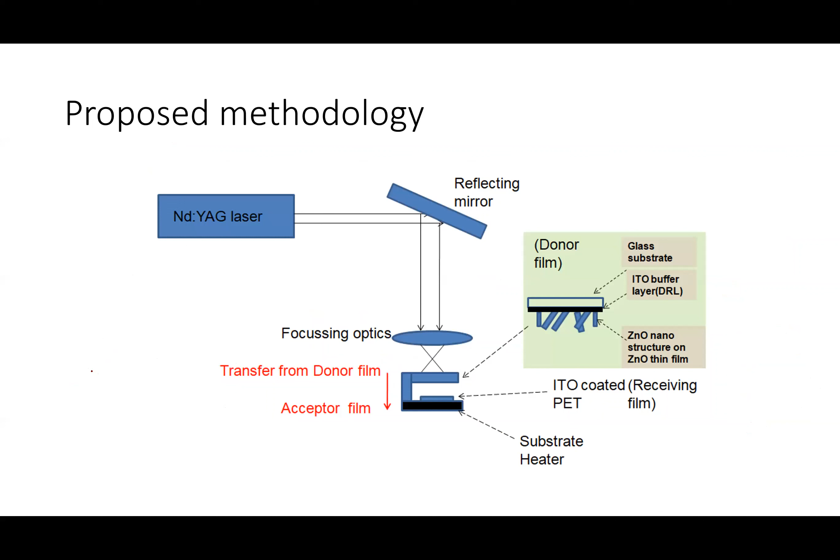To give you clarity, we were looking into the particle dynamics, how the particle flows from one region to another. This is one particle dynamic experiment which we did in our laboratory in collaboration with one of our Japanese counterparts, to study how the particle flows from the donor to the acceptor. This is a kind of shadowgraphic concept.

In this shadowgraphic concept, this is our donor region and this is our acceptor region. From the donor region, the laser interacts, the particle moves in this direction, and it gets collected in the acceptor region. The major parameters involved are laser fluence and spot overlap, which take care of the transfer of the particle from the donor region to the acceptor region. Here the laser fluence is quite heavy, around 550 millijoule per centimeter square, resulting in a high velocity coming out of it.

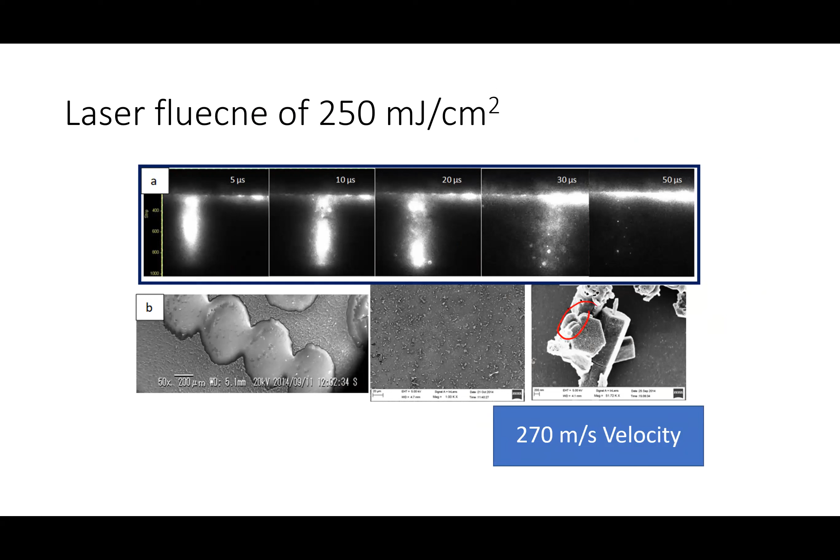Because of this, when the velocity moves at very high speed, it will damage the acceptor and the donor. So we reduced our laser fluence to 250, where there is a transfer of particle from the donor region to the acceptor region. We could see laser interacting on the surface which needs to be transferred, and a kind of melting which happens.

The third case is an efficient one which gives us clarity, where we are making thin nanostructures and using a laser to irradiate it. The sacrificial layer goes off — here we are using ITO as the sacrificial layer — and the transfer of the particle happens. This transfer can be on a large area or a small area, depending on the size of the laser we are using, and we could estimate the velocity was around 270 meters per second.

We then slowly reduced our laser fluence to see how the particle moves. At 50 millijoule per centimeter square, where the laser fluence is less, we could see the particle just falling on the surface without any impact of the laser on the material.

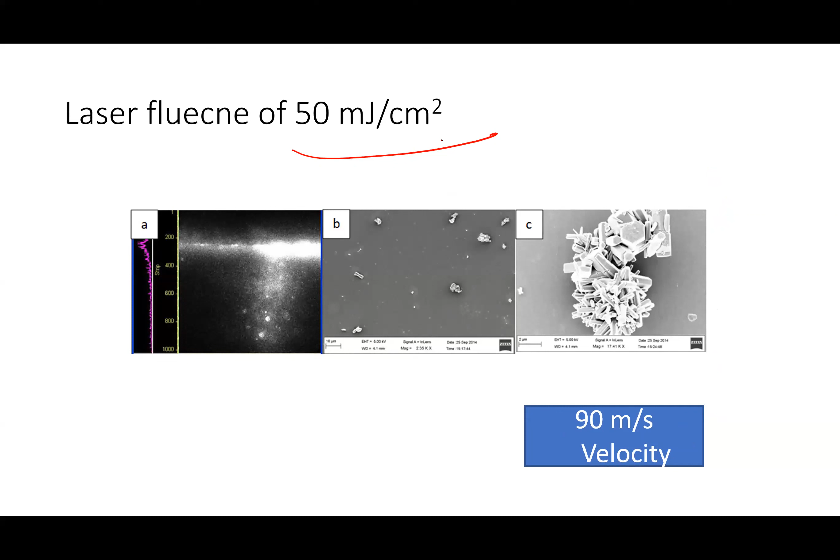From this study, we could understand that this system is very good for transferring any kind of structure from one region to another. For example, nowadays people are working on flexible electronics, wearable electronics, etc. In all these, you use textile material or flexible PET materials, and it is very difficult to build a high melting material directly on it. Whereas we can develop a high melting material in some other region and then transfer it onto these wearables or flexible structures. So this is one of the promising techniques we thought of.

Now you might ask me, how about the adhesion? Because in our earlier case, we were trying to build structures from the substrate. But here, it is something like transferring the particle from one substrate to another region.

So in order to take care of the adhesion, what we are doing is keeping a plate heating so that we prepare the surface so that the particle gets adhered to it. This is a kind of Scotch tape test to confirm how the adhesion looks like. We got a better adhesion, and most important thing is it is something like throwing a particle on a wall at a very high velocity.

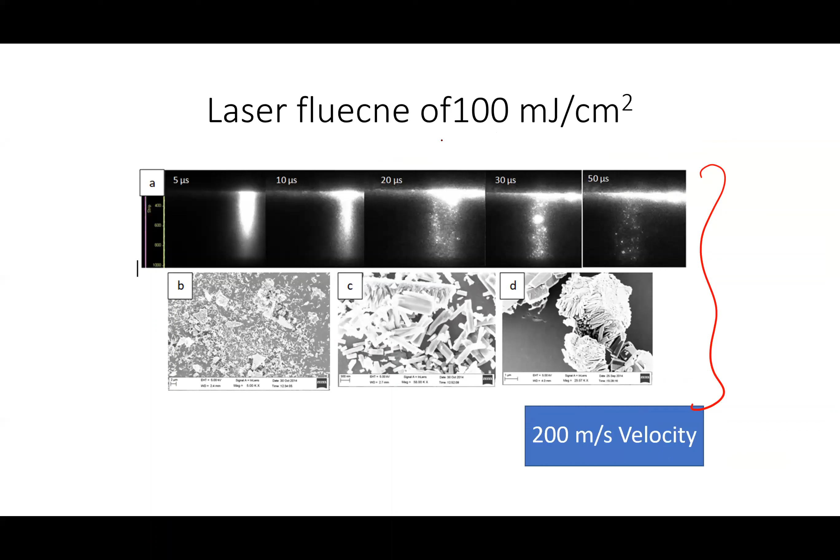So what happens is the particle will easily get stuck, and then there will not be any improvement in the adhesion. So this is some kind of preliminary result which we did.

Now we will come to the exact 3D printing concept. Here, as I had mentioned earlier, I need to have a film. This film should have a sacrificial layer, and the material which needs to be 3D printed has to be coated. Like in most 3D printing and additive manufacturing concepts, our raw material will be either in the form of a wire or a powder.

Even people have attempted going for sheets using friction stir welding, additively manufacturing sheets. But in this case, this is a new concept where thin film is going to be your raw material. So now you have the flexibility to create any kind of thin film material.

For example, if I want to make nickel titanium, I can go for a nickel titanium sputtering target or thermal evaporation. I can coat it and then go for 3D printing.

Second concept is I can go for multiple layers, like one might be nickel, another might be titanium, and here this is a sacrificial layer, so that the transfer will happen with respect to both on the surface.

Third important concept is this is a kind of maskless manufacturing, like how you go for a die-less manufacturing. This is towards microelectronics printing, where people have to prepare a mask. Here you don't require that mask. You can just directly give your drawing and do it.

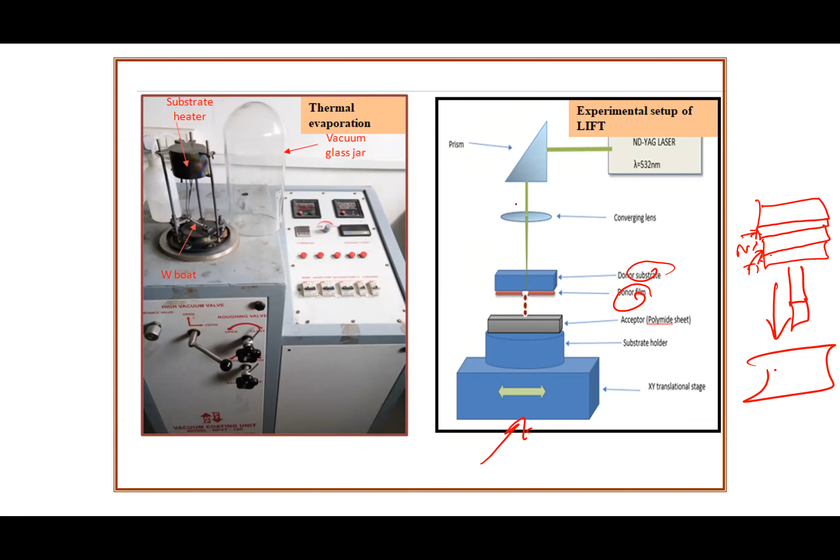So this is a preliminary result which we did. We had a small polyimide sheet, and we made our own XY stage. This is a donor substrate and this is a donor film. Using thermal evaporation, we fabricated a small thin copper plate, a copper sheet, and we tried to transfer the copper. In fact, this is a kind of deposition which we could observe.

So this is a kind of nickel titanium copper where we could build some kind of structures or some kind of pillars out of these structures.

The only thing is you need to move your acceptor, and then appropriately incident the laser on the sacrificial layer and acceptor on the donor. Then from the donor, the particle will move from donor to the acceptor, and it can build the structure. Either you can build a structure in this direction, or you can manipulate your base, or you can build a 3D structure out of this, whatever you want.

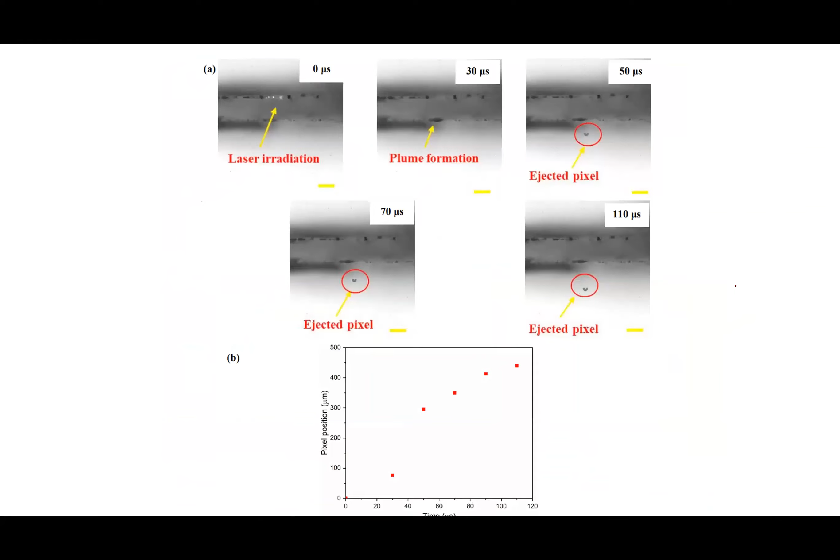With this as an idea, we thought of developing our own unit. So we did some theoretical analysis, in fact the particle dynamics of the system, which I will just show over here.

So we can go spot by spot. In fact, we have gone for a 99% overlap spot by spot, so that there will be a minute transfer which happens where we can have proper features coming out of it.

As far as NiTi structures are concerned, this shape memory alloy has its own pseudo-elastic behavior. We were trying to fabricate some kind of strain gauges using these kinds of shape memory alloy structures using this system.

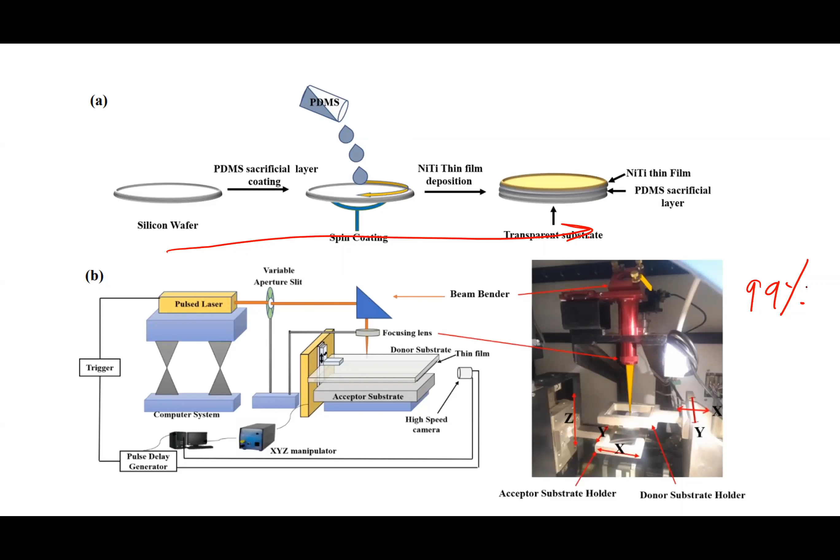So when we try to fabricate, there is a high-speed camera which is integrated, which helps us understand the particle dynamics coming out of it, as well as helps us understand the substrate through which the printing takes place.

Okay, so this is a kind of printing. Here is a kind of parametric optimization which we have done with respect to different laser fluences, where we try to build a small micro track, and these are some micro tracks with respect to different laser fluences and different continuity.

And this is a kind of large area printing where we were doing it to study the adhesion analysis of the system, and these are some kind of features which we have built.

Okay, so this is a closer view of the feature where it's a nickel titanium based structure which we have built using these structures. In fact, we have fabricated some kind of strain gauges using this NiTi, which is showing very good strain capability.

In fact, the interesting part of this, so this is how we have fabricated our strain gauge, which is fabricated with NiTi. There is a donor substrate and a sacrificial layer available, and we deposited our NiTi thin film using sputtering, and then the transfer was happening.

So we wanted to map it with commercially available strain gauges, which are available at different widths. With a single shot, we can build up to 300 nanometers. So we went for 3-layer and 5-layer, and checked its performance.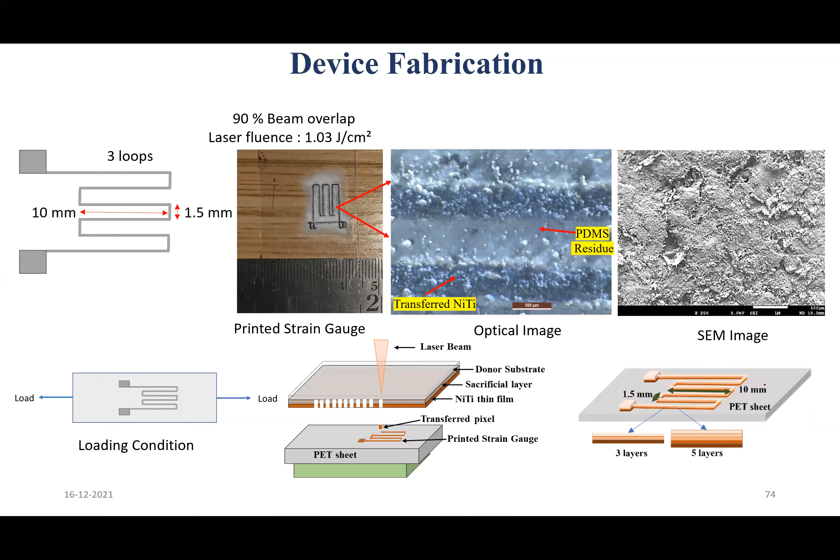In fact, this is the performance of the strain gauge we fabricated in-house, where with 5 layers we could get up to 88 kilo ohm, and at 3 layers we could get up to 220 kilo ohm. We could easily achieve such structures.

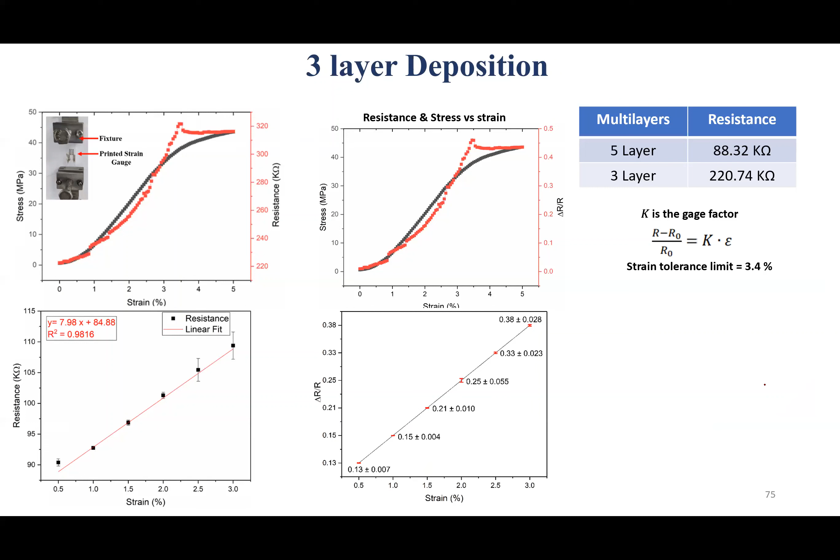Now, currently we are also in the process of building some kind of micro gears. We are also developing piezoelectric and triboelectric based generators for some applications.

Okay, so with this I would like to close my lecture. I thank my entire research group. This is a collective work which we have been doing for the last 10 years at IIT Indore, which is more focused towards additive manufacturing. Apart from that, we also work on devices.

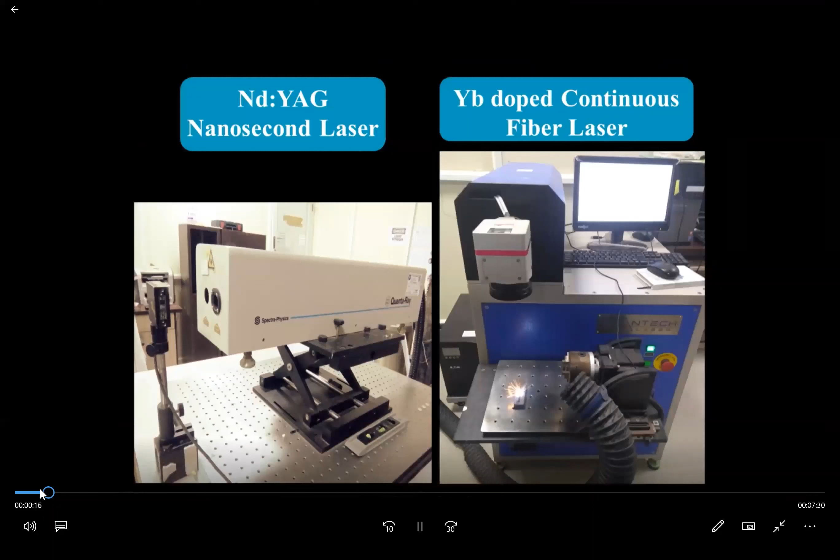So we have a 2 kilowatt welding unit which is available, and we work on thin films basically for developing some kind of bimorph actuators, which I was mentioning. We used to give samples to different colleges to educate them towards this shape memory alloy, basically towards developing a Make in India actuators.

Okay, so our lab is a mechatronics and instrumentation lab. We are involved in skill-based training with respect to pneumatic and hydraulic systems.

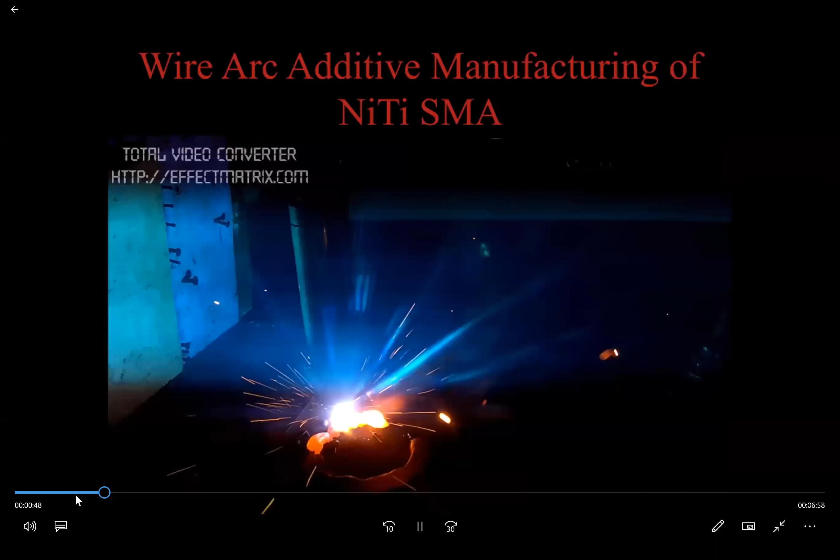As I had mentioned in my presentation, it has a capability to go for substrate cooling as well as substrate heating. So we have designed a turret mechanism so that we can change the substrate heating as well as cooling unit.

So we also work on NiTi based welding, which is a completely tedious process, not possible by other techniques. This is one of our student's work, where he fabricated NiTi structures using friction stir welding.

And this is an experimental test bed which we have developed at our lab with a laser displacement sensor to study the actuation behavior. Basically, this is an electrical actuation being performed to study the reliability and life cycle of the structures we have fabricated.

So this is the laser actuation of the NiTi structures.

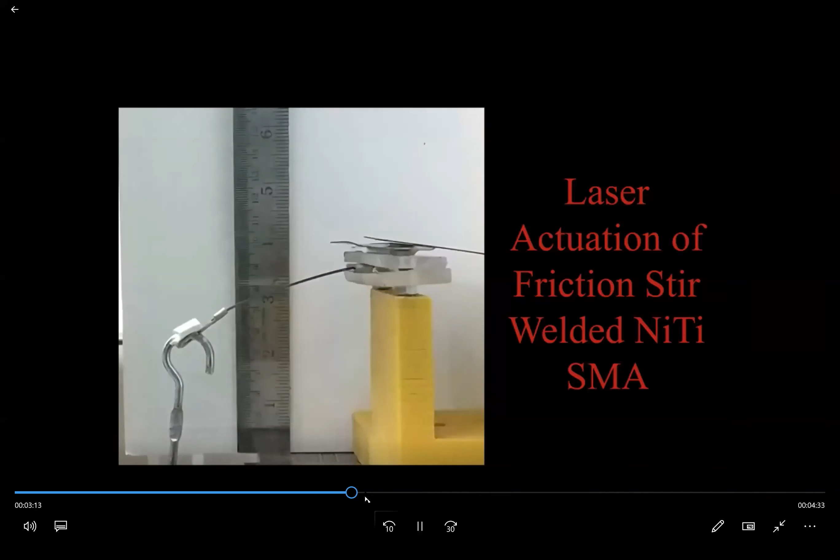So this is a concept called die-less manufacturing, where we are involved in some kind of laser forming of brake pedals and clutch pedals, which is, as a consultancy, we work with different industries in prototyping brake pedals and clutch pedals using laser forming. This is one thing we were employed in making engine cabinets using laser forming.

So this is a kind of laser peening which we were involved in. This is an SMA integrated composite structure. We are closely working with DRDO to make some kind of missile flappers. This project is almost over, and we have submitted the components to them for testing.

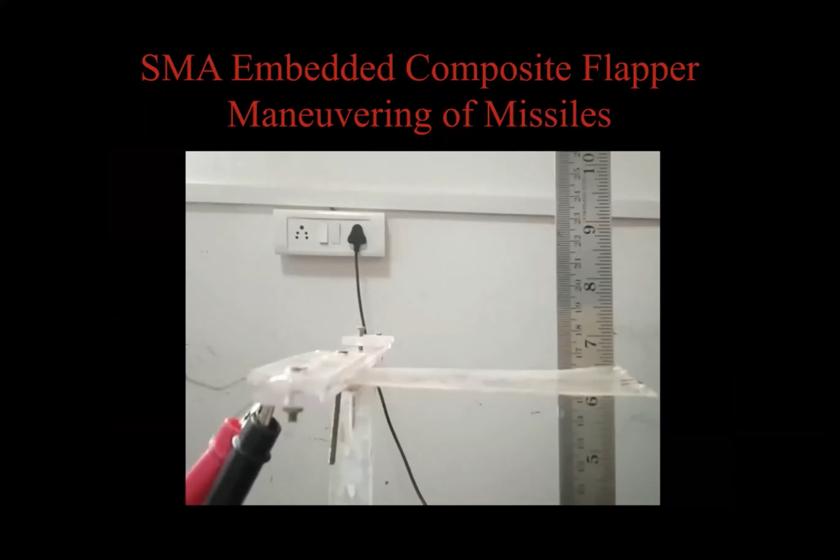This is a kind of SMA based perpetual machine, basically an SMA based heat engine, which is mainly used for harvesting energy from hot water conditions. As an extension of this work, we have worked with one industry to make intelligent cooling fans, smart cooling fans, out of it.

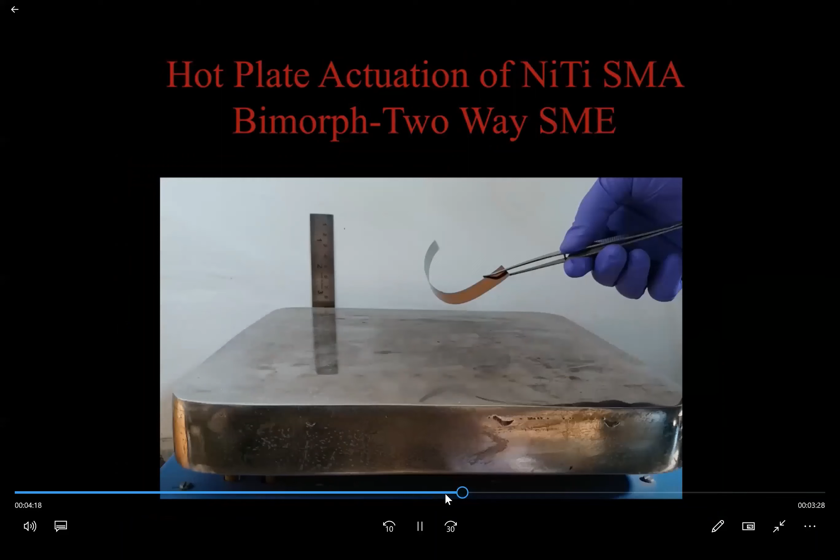This is called an SMA bimorph. You don't require any kind of training for programming these materials. Whatever displacement you require, or whatever frequency you require, based on that, during the deposition itself, we can program it so that it can actuate with respect to that frequency.

It has potential application as intelligent mirrors for astronomical telescopes, and it also has potential application towards soft robotics. We are also developing some kind of PDMS based soft robotics for high frequency applications. This bimorph is completely unique of its kind. On an international context, we are the first to fabricate a 1 meter by 1 meter area. We are promoting this technology so that more faculties can use it for different applications.

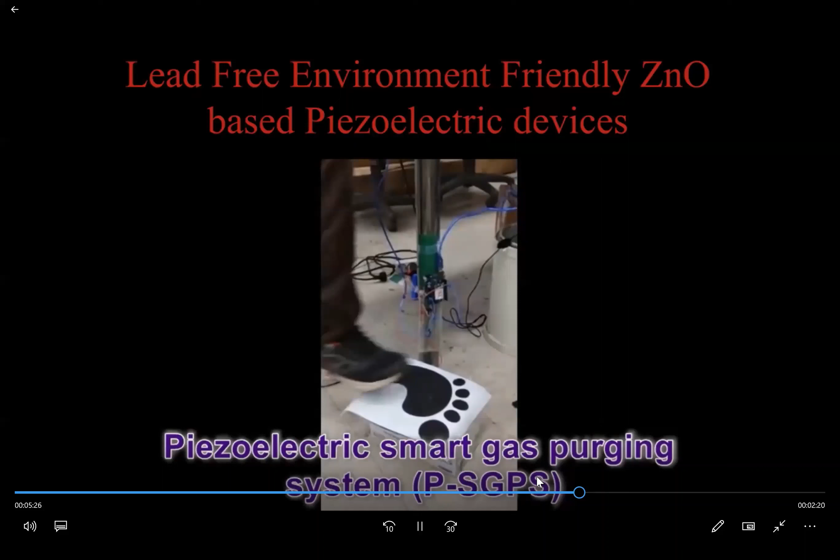Currently we are moving towards these lead-free piezoelectric smart actuators. The idea of these lead-free piezoelectric actuators is to harvest energy. Wherever you have vibrations, we can harvest the energy, or wherever we can apply a load, we can harvest the energy. Here, this is one of our research scholars, Dr. Rajagopalan, who's now working in Germany. He has fabricated piezoelectric structures through zinc oxide, and by just applying a load on it, he is trying to generate energy, and that energy is used for a chemical reaction.

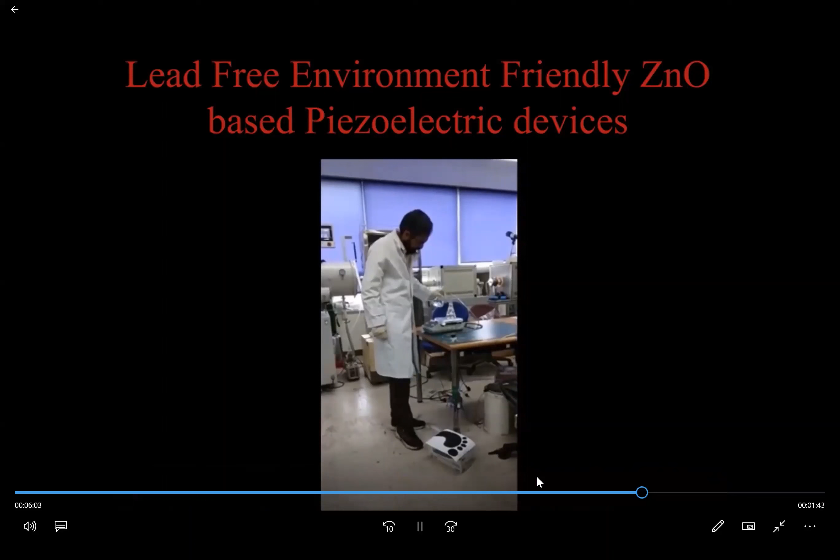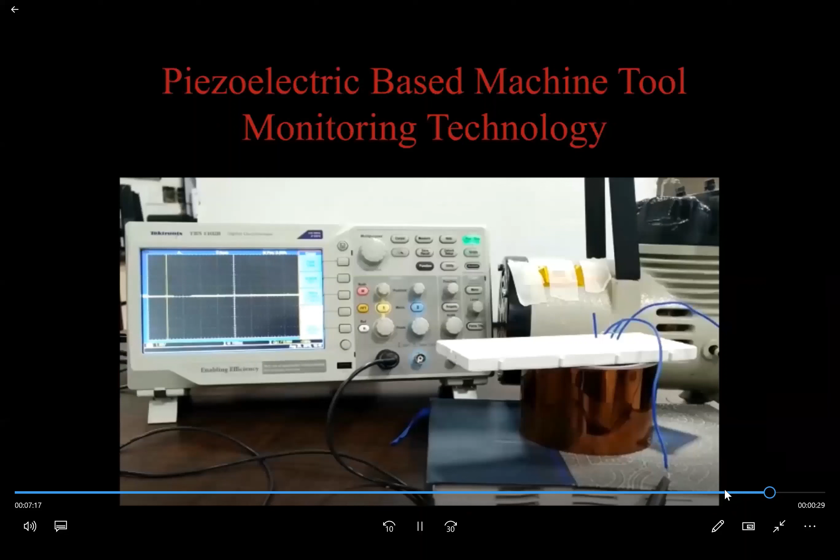Now we are more focused on piezoelectric nanogenerators, lead-free piezoelectric nanogenerators, which have a capability to harvest energy from machine tool vibration, and it can be used for condition monitoring also. This is a compressor in which a PENG is kept, and we are trying to harvest energy from the vibration.

With this, I would like to close my lecture. If there are any questions or queries, I would be happy to address them.

Yeah, thank you, Dr. Palani, for a very wonderful talk, which is very enlightening and I would say very rich talk, very informative content. I believe all the audience would have definitely benefited from your talk. You covered entirely from macro structure to micro structure, even down to nanostructure, component making using laser assisted processes. With this, I request the audience to ask questions if you have any.

To the audience, Dr. Palani is also very open to helping the student community. He's very student friendly, so you can approach him if you have any interest in pursuing research. Dr. Palani, I'm taking advantage of this, knowing your nature. Yes, so you can approach Dr. Palani for any academic related help.